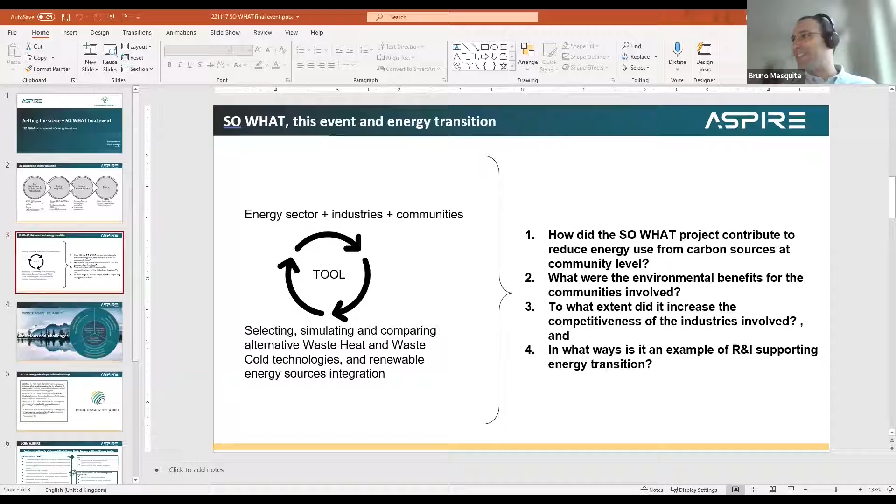Good morning, everyone. Yes, I can hear you. So thank you for having me today. I will share my PowerPoint. I mean, I don't want to start today by boring you too much. So this is just like a quick visual aid.

My name is Bruno. I am a project manager at A.SPIRE, an association of European process industries that represents 10 sectors, more than 22 countries, and it has 180 members. My objective here today is to briefly frame for you the challenges facing us in terms of energy transition.

So, given what is happening in Europe, you will probably not be surprised if I tell you that the EU has a serious energy problem. In fact, the EU can only provide half of its gross inland energy consumption. For instance, in 2013, we produced only 47% of our needs. As a result, the EU is dependent on non-renewable imports and primarily of fossil fuels.

In the middle of the 2010s, the International Energy Agency was even predicting that Europe's energy import dependence would increase to 90% by 2035. And moreover, of course, in terms of environment, our energy systems and industry account for at least 2/3 of the total greenhouse emissions.

So it is therefore not surprising that the EU has set ambitious goals to change that. We are seeking to reduce our greenhouse emissions by 55% in 2030 and to be climate neutral by 2050. The objective is to limit global warming to a manageable 2 degrees Celsius so that we can have safe, healthy lives and continuing livelihoods and stable, rich ecosystems.

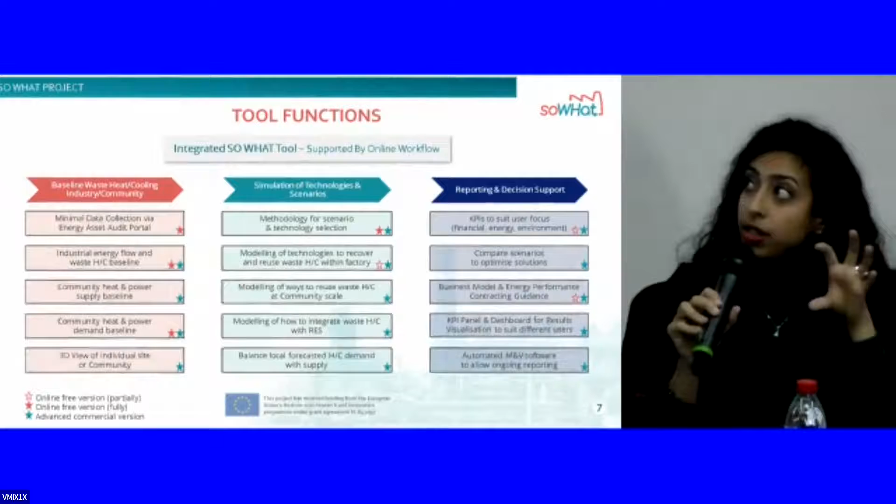As you can see, the tool starts by estimating the baseline in terms of waste heat and cooling, industry and community. Then the industries and the final user have the opportunity to simulate different technologies and scenarios. And afterwards, there is the outcome of the tool that supports the reporting and the decision making.

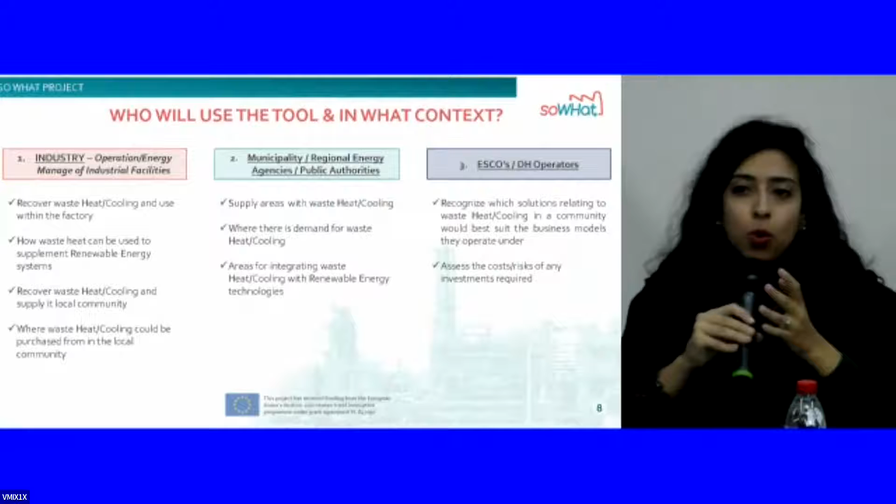The targeted final users are industries, so main players of the sector, the municipalities, and regional energy agencies, public authorities that are the decision makers in that field. And finally, the ESCOs and the district heating networks, because we are talking about recovering this waste heat and cold, which could happen either internally in an industrial site or externally. In that case, ESCOs and district heating operators are highly encouraged to consider all the opportunities in the surroundings.

This was my first couple of words to introduce the So What project. Thank you very much. I would like, before leaving the floor, to thank in particular my colleagues from RINA Consulting, Arianna Amati and Francesco Peccianti, who are the coordinators, previously Francesco and afterwards Arianna, that allowed the smooth development of this project in the past 3.5 years. Thank you very much.

Thank you very much for the introduction. It's my pleasure to give a snapshot of this important phase of the project, the Industrial Site Assessment and Technology Database, which covered one of the first work packages of the project. I was particularly glad to lead this piece of work, but I have to acknowledge some key contributions: people in my team in Birmingham, but partners were instrumental to the work and the results we achieved. The IES team, the RINA team, MPI, and in general the industrial partners for the support in the Industrial Site Assessment and Technology Database.

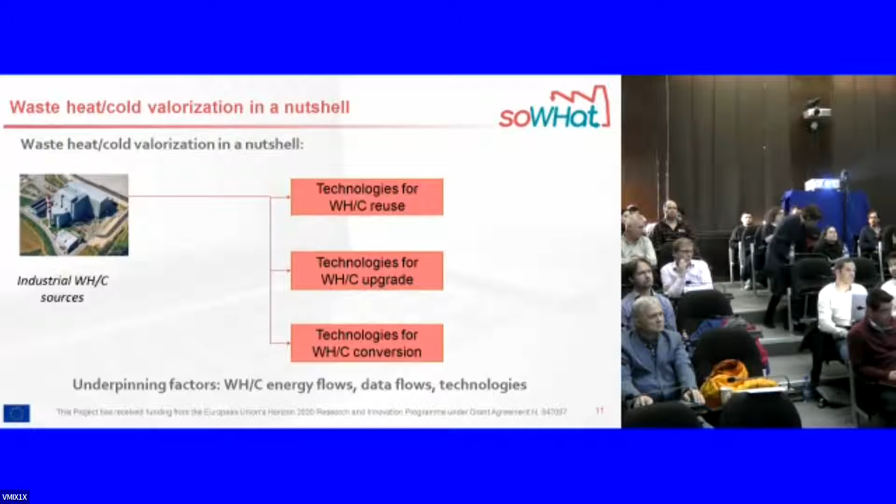So once we have the asset to recover the waste heat, what we can do, and what the SO WHAT tool helps to understand, is how to reuse this heat either internally in the industrial sites, or potentially, and this is one of the key selling points of the SO WHAT work and tool, externally. So we might interface this recovered heat with external networks. This can be district heating, so industrial symbiosis between the industrial site and the surroundings. And if heat is converted into electricity, perhaps with electricity and energy networks.

And on top of that, if we have an increased amount of renewables and intermittent sources, we might want to store some of this energy to use it at the best time. So out of this quick run through the basics of waste heat recovery, you might understand that there are three key pillars that were part of the work done in this phase of the project. Understanding the energy flow, so actually identifying how much waste heat is available, having the right information to do this assessment, so data from industrial sites and in general from the infrastructure that you see here, and obviously the technologies. And I'm going to touch upon each one of these three aspects that were covered during this industrial site assessment and technology database.

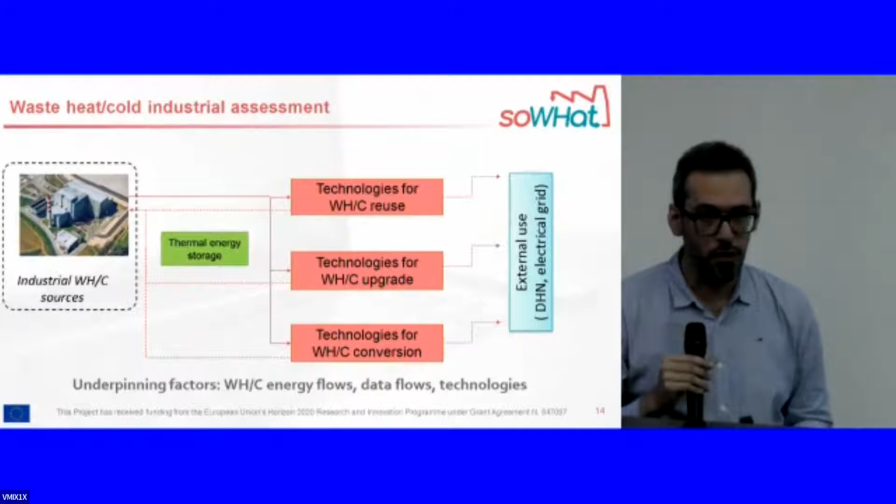Very importantly, a big chunk of work was done on understanding how to overcome the challenges in collecting data from industrial sites necessary for this type of assessment, and also some work on the mapping algorithms that I'll discuss briefly as well. So going back to this model, I'll touch upon those three key aspects, starting from the industrial sites and the assessment that was carried out in this space with the demo sites in this project.

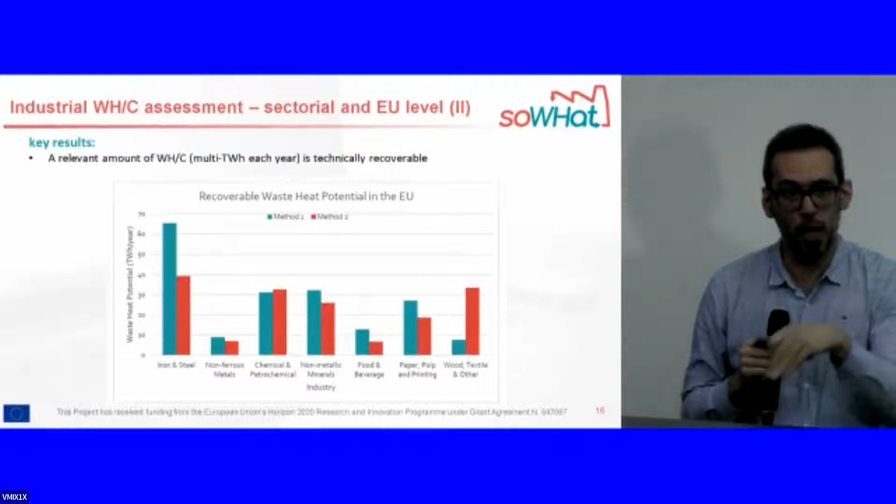So this is fine as long as we are working at sector level, but we want to help industrial partners, industrial sites, and the SO WHAT tool intends to do that. So we have to drill down to a more granular level and move from a sector to actually process level, so that the industrial players can actually identify how to remove these inefficiencies.

So this range of industrial sites allowed the project to test the tool in very different conditions, and also essentially identify a way to recover waste heat from relatively low temperature heat, 70 degrees or so, to particularly high temperatures across the sector. So for example, food and beverages are typically relatively low temperature waste heat, and if you move to steel and metal manufacturing, obviously we are going above 1000 degrees C, and it's essential that the tool allows us to span all this range of temperatures.

So as I mentioned, the first phase looked at assessing at process level, at individual site level, how the waste heat was wasted indeed. And this has been much more challenging, but also basically the added value of this tool. So as we move to assessing the industrial sites, we found that in general there was consensus that at industrial scale, first it is essential to quantify where this waste heat is occurring. So literally at which location in the process, which are the units where heat is wasted.

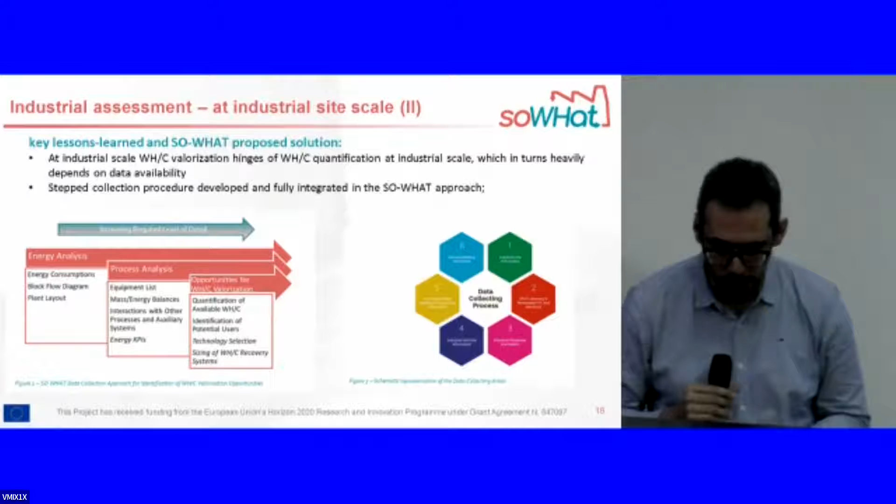And overall, out of this initial assessment of industrial sites, a stepped procedure to capture data was identified. And the SO WHAT tool has essentially a guided procedure along 6 macro steps that allows the end users to obtain the right data to identify the amount of waste heat, and then to select the best decisions to valorize this waste heat. So this was one of the key aspects in the first phase of this assessment at industrial scale.

So the team of the project did this for all the industrial sites, all those 11 sites that were presented before and that I briefly touched upon. So obviously there is no time to go through all of them. I picked an exemplar case to give you a sense of the potential and the capabilities of the tool, and of the assessment that was done.

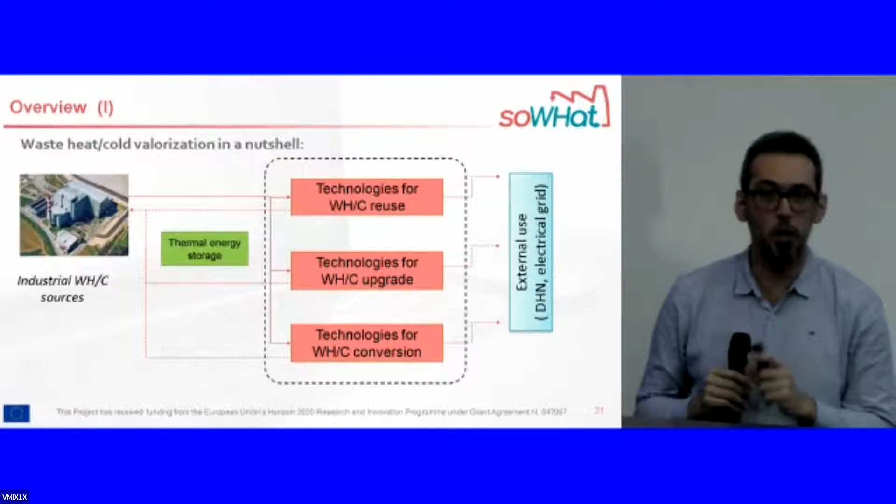So going back to our simplified model of waste heat and cold recovery, I'll move to the second pillar that was covered in this part of the project, which is the technologies, the actual assets that allow to recover and utilize this waste heat. And this is a piece of work the University of Birmingham led.

One of the key selling points of the SO WHAT tool is that it spans across all the possible types of technologies that are available on the market or that are emerging. So an interesting bit is that the SO WHAT tool allows the end users to also be conscious and aware of emerging technologies so they can direct their investment at the right time, so that they can have a competitive advantage by adopting more advanced technologies.

But there are essentially five categories, from traditional ones like heat exchangers, waste heat to cold, so sorption chillers, for example, heat upgrade, heat pumps in general, and power cycles, where the waste heat is used to produce electricity. And the remaining one, which I will discuss separately, is on energy storage and thermal energy storage. Those are enabling technologies, as I will discuss later.

A good amount of information is captured in one of the public deliverables of the project that is on the website, where, for those of you that are interested, you can read 250 more pages about technologies. Obviously, I cannot cover all of those. I'm going to give you, again, an exemplar case to give you a sense about the information that is there and how it can benefit you.

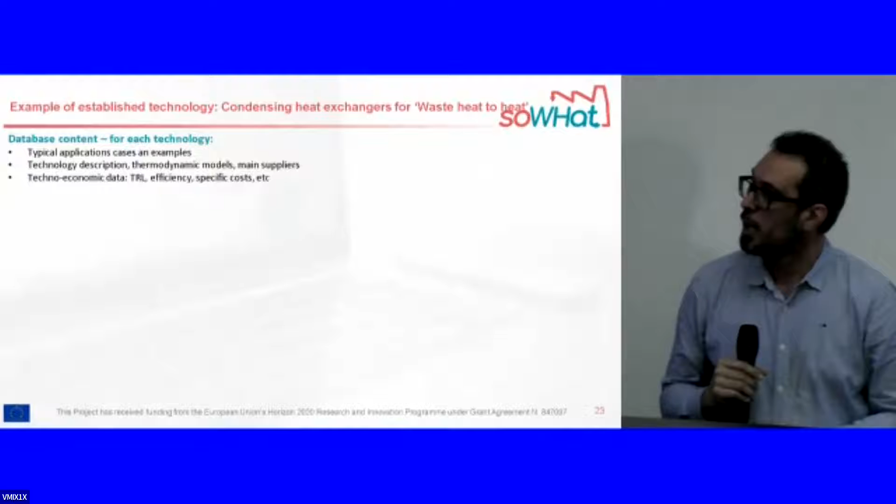The deliverable provides also the key information about who the suppliers of this technology are, and very importantly, for industrial players to do technical assessment, and obviously for the SO WHAT tool algorithms as well, there is technical and economic data about these technologies. So you can find performance indicators, efficiency, and costs of these specific technologies to take informed decisions on potentially investing in them or using them.

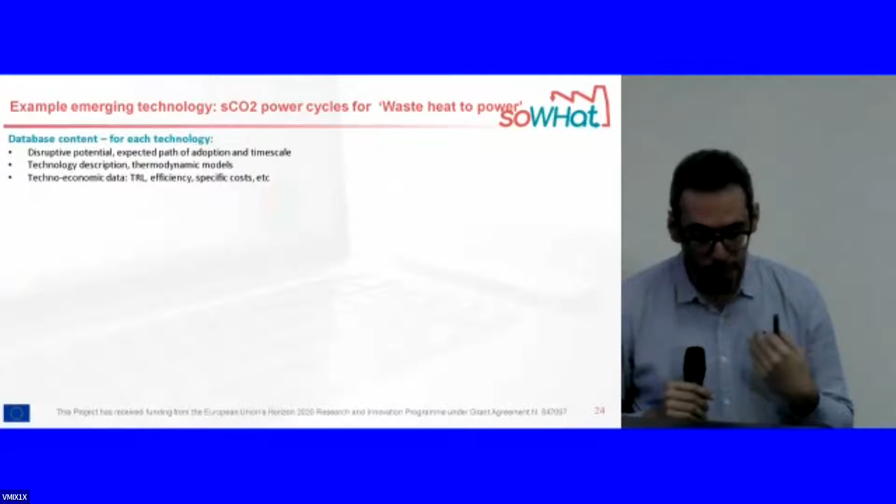So it recovers waste heat by converting it into electricity. There are various reasons why supercritical CO2 can be used and why it's beneficial. That's part of the information captured in this project. As I mentioned, this is a case of emerging technology.

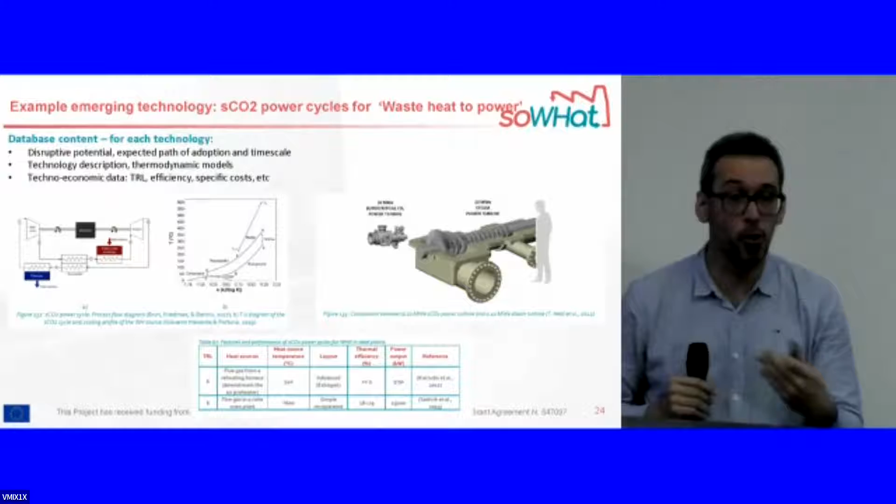And similarly, there is some indication in this case about the TRL level. So how close this technology is to be adopted, and what are the typical performance parameters for this technology, so that eventually industrial stakeholders can be aware of the fact that this is coming up and is near to market potentially, and they can take actions if necessary, or if the technology fits their needs, with the support of the SO WHAT tool.

Okay, moving to the last pillar that I want to cover with our mental model here for waste heat recovery. One of the key aspects of the SO WHAT tool is where we wanted to look at how energy storage might fit into the picture of waste heat and cold recovery valorization. So the fundamental reason is the following one. Traditionally, industrial processes have mostly used fossil fuels as a way to produce process heat or cooling. So a dispatchable form of energy. This means that you can always potentially use fossil fuel at any point in time.

That dramatically changes if we move to intermittent renewables or perhaps intermittent waste heat, where the primary source, the waste heat or the renewables, might not necessarily be available when we want to use it. So we need an extra degree of freedom in the middle that allows us to either store the primary source when it's not used, or release it when we actually want to use it. So the work that was done was about thermal storage.

There are a number of open access publications that were produced in this project that are, again, available for consultation, and obviously the necessary algorithms and characteristics have been brought into the SO WHAT tool as well. So I'll give you a snapshot about what has emerged from this part of the work in this project. First of all, there is a range of possible technologies. Most of the industrial players, we became aware, know about traditional ways to store heat or thermal energy, say in stratified hot water tanks, up to 150 degrees C if you work in pressurized conditions.

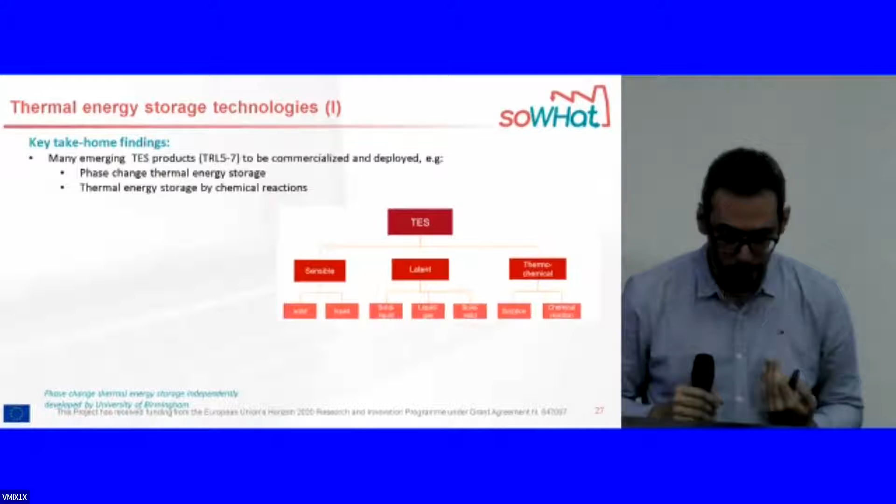Out of the understanding that we developed in this project, we actually developed one thermal storage technology that uses a certain substance to store heat at 100, 200 degrees C. And this is now in use at an industrial partner in a national project. Without the understanding from developing the SO WHAT tool, we couldn't really have developed these technologies. And now it's used in the food and beverage industry to mitigate the intermittency of waste heat and make the process more efficient.

So, as I mentioned, there are various applications from an energy storage perspective. The typical ones are energy efficiency, so waste heat recovery, valorization, etc. But also quite a bit of renewable integration can be facilitated with energy storage. And again, the algorithms and the assessment carried out in this phase of the project fed into the development of the tool that you will hear about later on, so that the tool allows decisions not only about the previous waste heat recovery technologies, but also on energy storage. And that, we believe, is an added value of the project and of the tool overall.

So I'll give you just an example again of benefits from an industrial perspective of using this tool, and in this case, using thermal storage technology. We have developed a specialized methodology in this phase of the project to help industrial players in deciding which is the best thermal storage technology for their case, how to operate it, and therefore ultimately how to select it and how this benefits the industrial players.

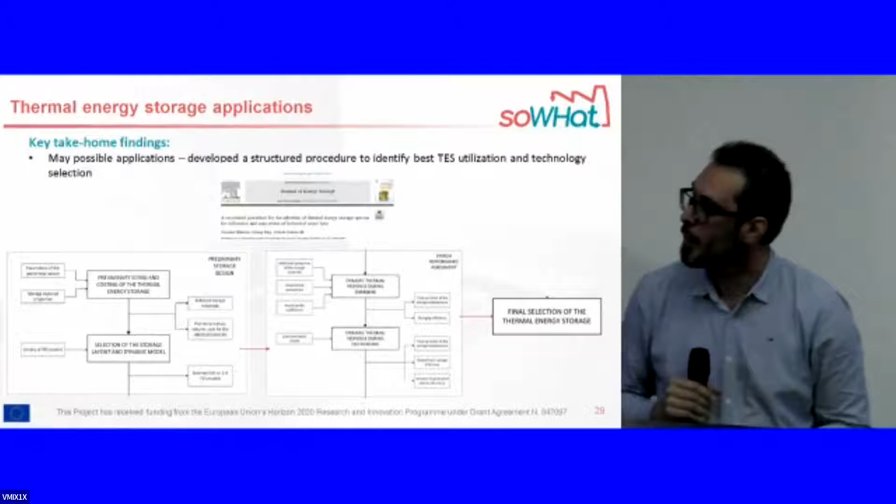So with storage, we mitigated that intermittency so that it could be used more easily by what is called the power block. A power block is a technology that converts that waste heat into electricity, but without first making it more smooth and more constant with the thermal storage, this was not particularly possible.

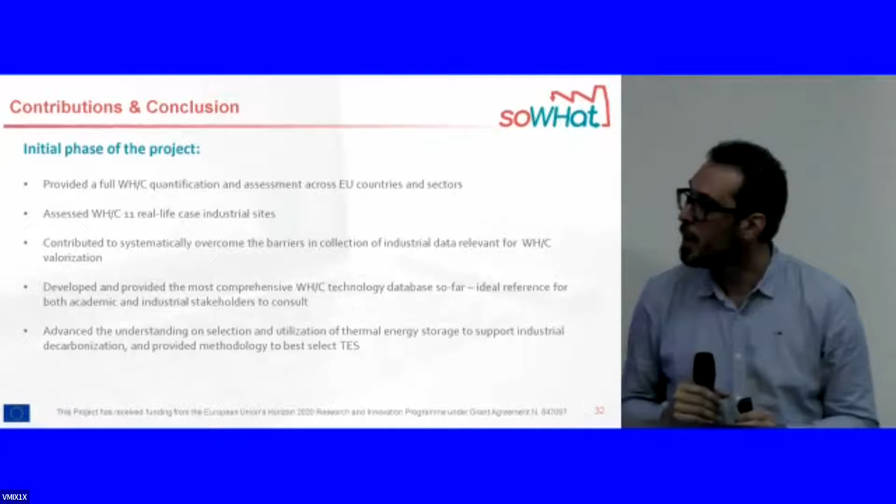So this brings me to the last slide. A quick final run-through of the contributions of this phase of the project. We provided a full waste heat and cold valorization assessment at EU level for each main industrial sector, assessed in 11 industrial demo sites. We contributed to obtaining a clear and systematic procedure to capture the data necessary for assessing waste heat and waste cold recovery strategies at industrial level.

We developed a range of algorithms and understanding of technology that is now embedded in the SO WHAT tool. And ultimately, on the R&D aspect, particularly advancing the understanding and the utilization of energy storage in the context of waste heat recovery and renewable utilization in industrial sites.

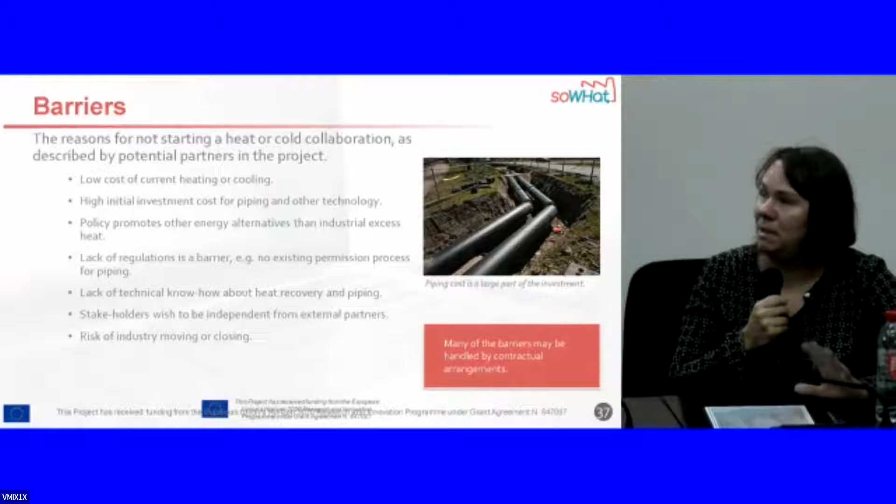Yeah. But what we see is that many of these barriers may be handled by contractual arrangements. So that is something we have dug into also, how to actually manage this, to overcome these barriers. And we have also identified the business risks. And this is something that is also elaborated in the tool. So a risk assessment can be made and some suggestions on how to mitigate risks.

But as you know, there is no such thing as a risk-free investment. But depending on local prerequisites, the risks related to heat collaboration will be quite different. Especially a watershed is if there is an existing heat network or not. But you can also see this as a risk reducing thing, because you will not be as dependent on fuel and the fuel prices that fluctuate. So it's not only risks, it's also a way to reduce risks.

As with the barriers, most of the risks can also be mitigated with good contracts. For example, you have to have a clear contract that states the responsibilities, which part of the technical equipment and so on is on which side, and who's responsible if things don't work as they should, and how to also communicate those things.

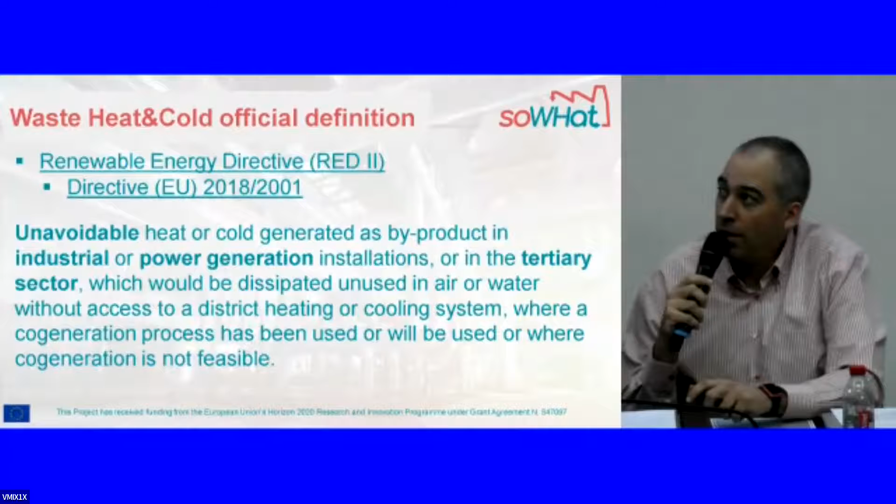So, I guess all of you are already familiar with the fire triangle. The fire triangle tries to explain that to start or sustain a fire, you require three elements simultaneously: heat, oxygen, and fuel. From the very beginning of the project, we applied this concept to waste heat recovery. So we use this analogy to define the three simultaneous components required for waste heat recovery. The first one is a source of waste heat, which has been deeply explained in Adriano's presentation. The second required element is a recovery technology, or a thermal storage technology. And the third element required is the end use of this recovered heat, of this recovered energy.

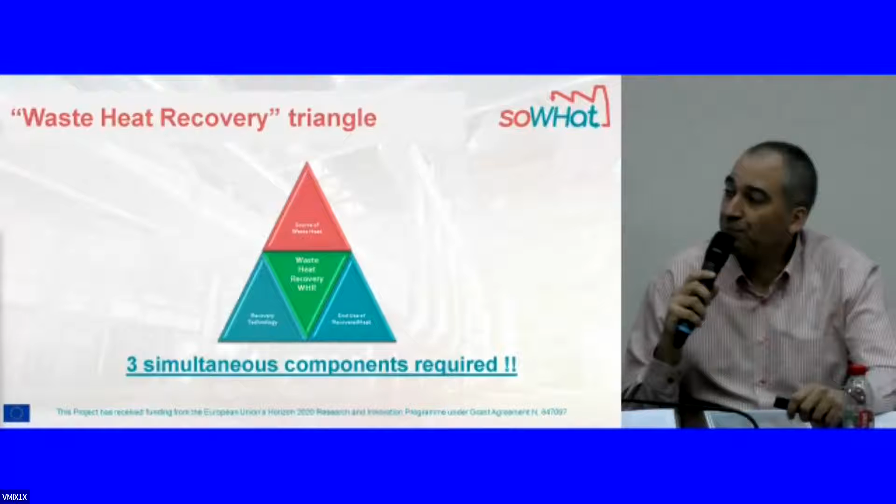So, starting with the waste heat sources, I'm not going to repeat Adriano's comments. You have plenty of information on our website, but we consider what is called the energy cycle. So from a conventional, and I repeat, conventional means industrial factory perspective, the energy is usually initially converted, and this conversion usually generates conversion losses, which can be a possible source of waste heat. For instance, a typical example would be steam boilers that convert natural gas into steam. Then we have the distribution losses when this energy is distributed along the different industrial facilities.

And again, this is a possible loss, but not usually considered a source of waste heat. And we will end with the end use of this energy, which again represents an opportunity, a possible source of waste heat.

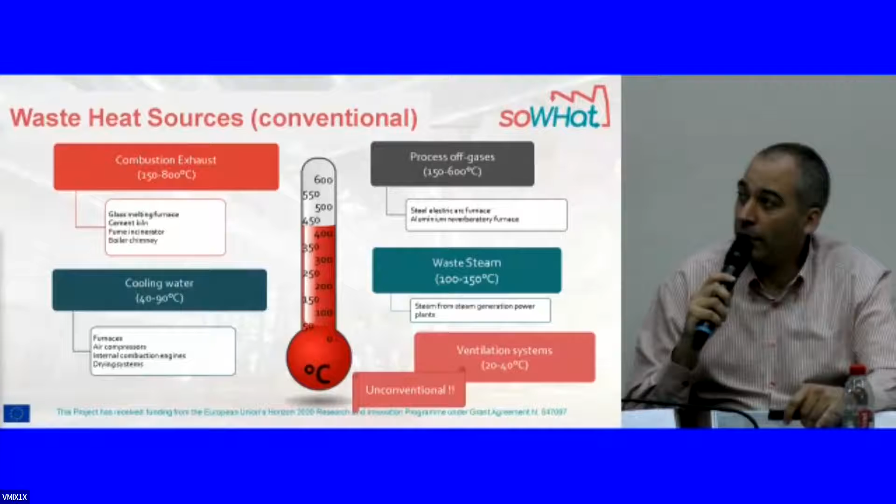Regarding the different temperatures involved, quite quickly, from an industrial perspective, from a conventional classification of waste heat sources, you can find combustion exhaust, process gases, waste steam, cooling water, and finally, ventilation systems. But in this case, ventilation systems could also be considered unconventional waste heat sources. Again, you have plenty of technical information in our first work package deliverables on our website.

So again, exactly the same regarding the technologies. Adriano perfectly mentioned it, I'm not going to repeat it. So we jump into the third element of the triangle, which is the end use of the recovered heat. And here we have two possible end uses of the recovered heat: internal use and external use. And I think we are sometimes forgetting internal use.

Internal use of the waste heat in a factory is quite important. I mean, for every case we found where a factory sends the recovered heat to an external use, we can find tens of cases where this heat can be used internally within the factory premises. And I think it's important to not forget about that.

Indeed, among our demonstration cases in the SO WHAT project, we have two use cases where recovered waste heat has been internally delivered without exiting the factory premises. So when we talk about internal use of the recovered heat, we have one straightforward option, which is to recover and directly reinject the waste heat into the same process that originally caused this waste heat. This is a typical example of retrofitting boilers to install economizers and so on.

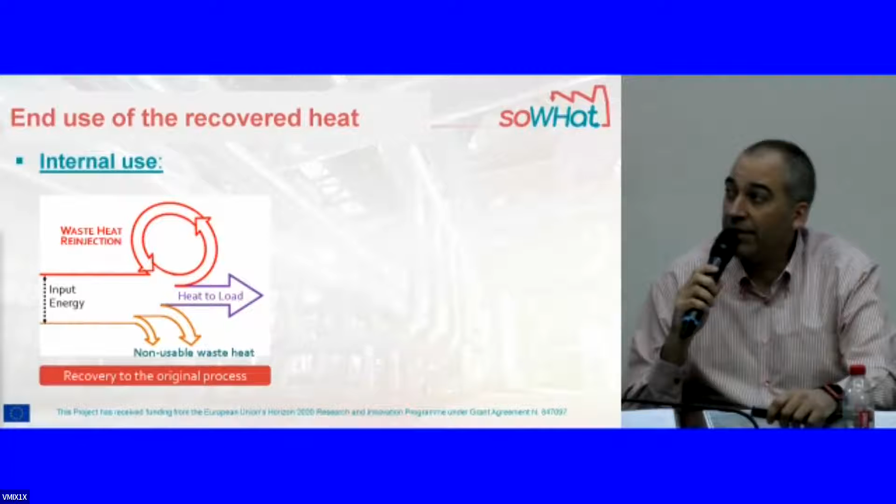Usually, it's not considered a waste heat recovery process. Sometimes it is perceived by factory managers as an improvement of the machinery efficiency. Then we have the second and more complex case, where waste heat is recovered from one industrial process and transferred to a second manufacturing process, but within the factory premises, within the boundaries of the factory itself. And sorry to repeat it, but these are two of the use cases we have.

And jumping into the external use, things get terribly complicated, as Sofia mentioned, because we have a possible source of waste heat, a possible company, a possible actor, and we have a different actor, which could be the user of this waste heat. You can initially think it's simple, but things get really, really complicated because, as mentioned, contract arrangements can get really complicated with or without the presence of ESCOs.

So you may have a possible use case where, from the technical perspective, everything is clear, not problematic at all. But when you make the numbers, there's no possible economic arrangement that satisfies the economic requirements of all the partners involved. So, to summarize, we have three elements to consider simultaneously. Obviously, to maximize waste heat recovery globally, we will have to rely on external recovery, and this probably can only be made through district heating.

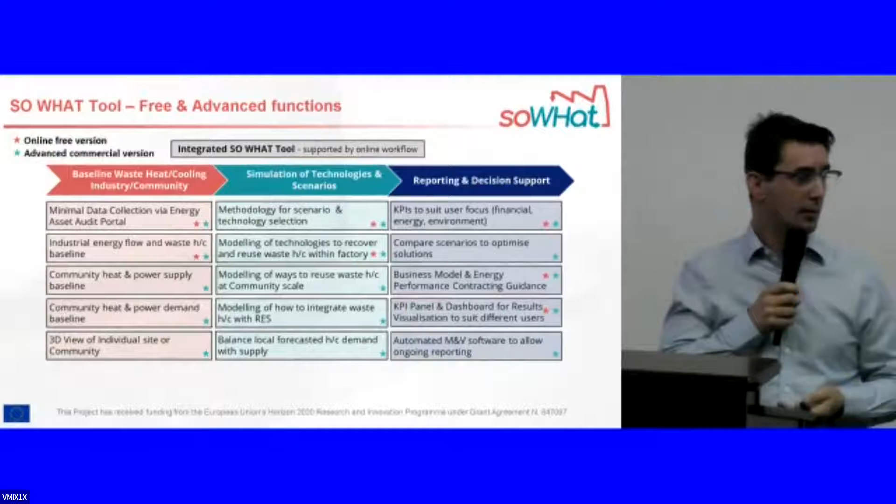There have definitely been two key areas that we've focused on in the project. One is the technical element and how you can technically do some of these technologies to recover waste heat and cooling. But the other aspect is how can this be done financially as well? And there are two different types of audiences, two different types of users that want to know that kind of information.

I think we've seen this slide earlier, but it was just about who are our actual users, who are we aiming this software at. We're looking at industry, where there may be any waste heat or cooling. We're also looking at municipalities and regional energy agencies. And we're also looking to engage ESCOs and district heating operators as well throughout Europe.

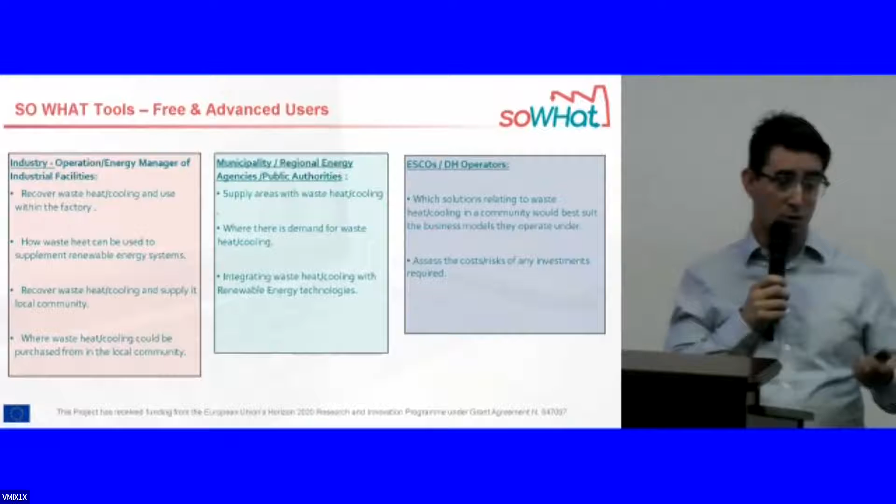So what I'm going to do is just talk everybody through the steps that we have in the free tool. And I'll just show an example of that, and then I'll go through the more advanced tool. And all through the whole presentation, I'll be using the case study or the demo site that we have in Italy, just as an example as to how you can use the tool.

So here, all the user needs to input to try and understand their waste heat potential is their country, the main fossil fuel that's used on their site, their industry, and the overall energy consumption of that particular site. And this then looks up against all of the information that we've been able to find about all industrial sectors and their waste heat and cooling potential in academic research. And we then run different calculations to come up with the waste heat potential of that particular site.

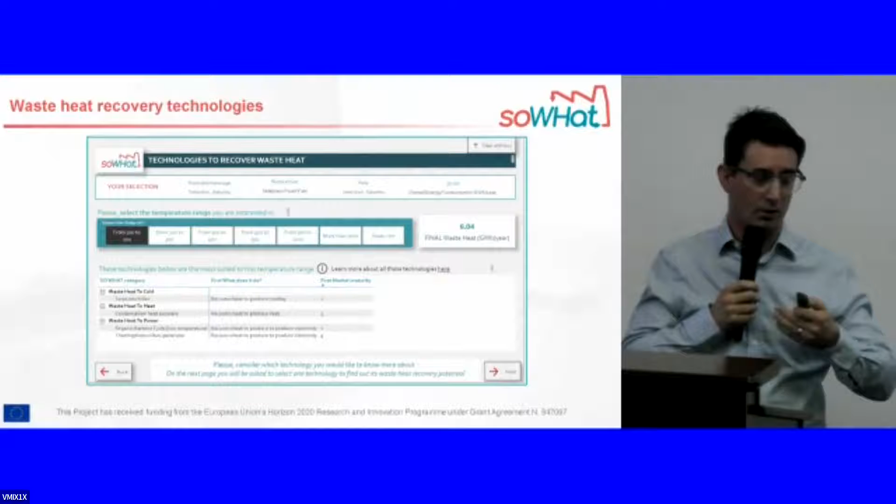And this also shows something around market maturity of different technologies. The project has tried to model not only technologies that are easily available across different countries in the market, but also ones that are just coming to market or are actually more just now in development phases. So if an industry wants to look at something that's quite innovative, this market maturity guide will also allow them to do that.

Once you select your technology, so here it's selected as condensate heat recovery, we then get some figures around what that technology might be able to produce in terms of the final heat outcome, and also the maximum temperature that it will give as well.

And the next aspect of the free tool allows you to do a quick risk assessment for your particular industry, which starts to try and allow you to understand what the particular issues or risks might be for implementing that technology. And we can see there that there's a spidergram that actually shows the different elements of risk, and then that allows an individual to go away and try and think about, okay, is this worth doing or not? How can we mitigate those risks?

We've also implemented in the free tool quite a simple financial analysis to give somebody a quick understanding, from just inputting different costs and investment scenarios and discount rates over time, what their payback or internal rate of return or net present value might be for that particular investment.

And I should stress that the overall aim of this free tool is to allow somebody just to get a quick guide as to, I guess, the best way forward for them in waste heat and cooling recovery. This is not supposed to be the final piece of work that you would do on it. It's just to allow you to do a quick 30-minute overview. Is there something here? Can I go further with this? Can I take this to my boss and say, give me some resource to now do a much more detailed assessment? That's what this is for.

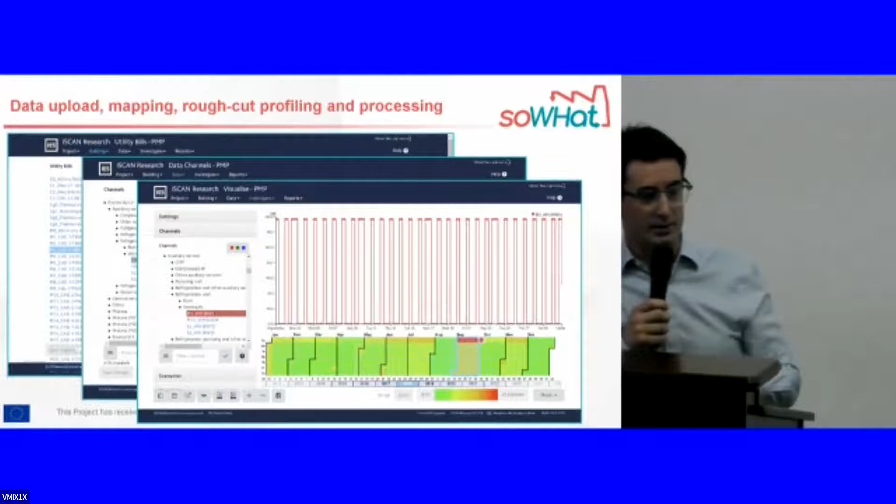We would also ask for the hourly schedules of different processes and how the facility actually works. That enables us then to take different processes, different meters, different billing information, and associate it with the different components in a facility. And we can then build a profile of a particular process in terms of how much energy it's actually using and also how much waste heat it might give off.

We can then model this. In here you just see a simple factory model, and those processes and components can be joined together. And we can actually also in the software look at different elements of HVAC controlling, and we can also look at different weather conditions that might be important for the future too, and we can simulate those.

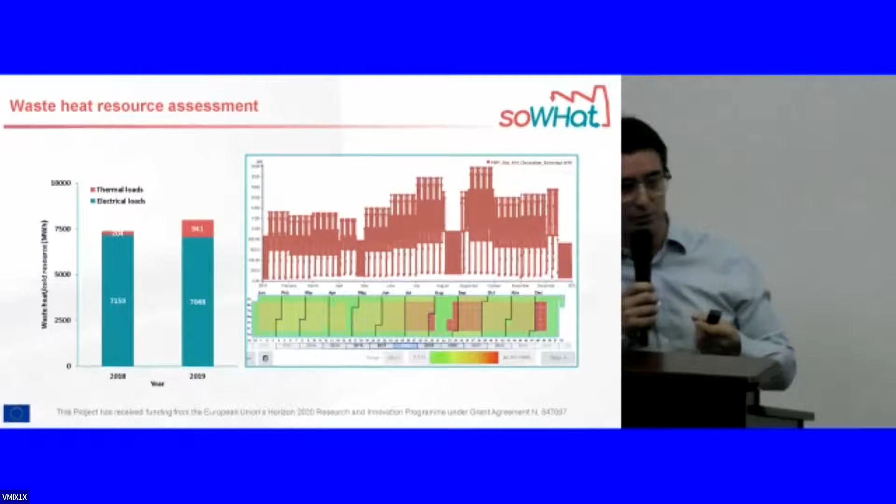At the end of this data collection exercise in the software, the graph on the top right actually shows not only your waste heat resource, but it actually shows that at a time series level, at an hourly level. I think that's quite key. You don't often see that. We're used to seeing maybe waste heat at a monthly or annual kind of figure, but actually being able to see it at a time step down to an hour is quite important if you're wanting to recover it and understand what you can do in your facility.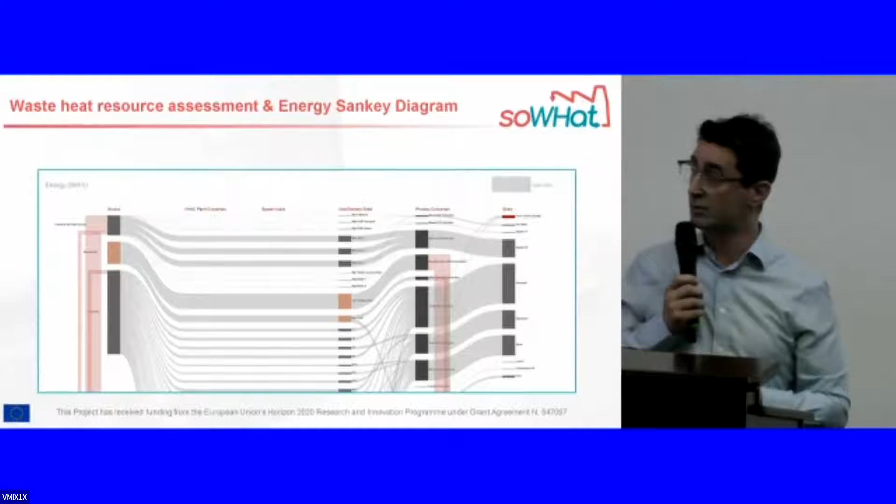And the little red box at the top right hand side of that energy Sankey diagram, that's the waste heat as a sink at the end of this flow, and that's where you would then look to focus to recover your heat from. And obviously this also gives you some temperature ranges and outputs in terms of how much heat there is.

In the software, the advanced tool gives you the ability to model things in a sort of 3D, give you a 3D view. And we can also bring in anything to do with energy, heat demand at this stage as well. So we're not only just showing potential supply aspects in terms of waste heat, but we also import heat demand from different buildings at this stage too.

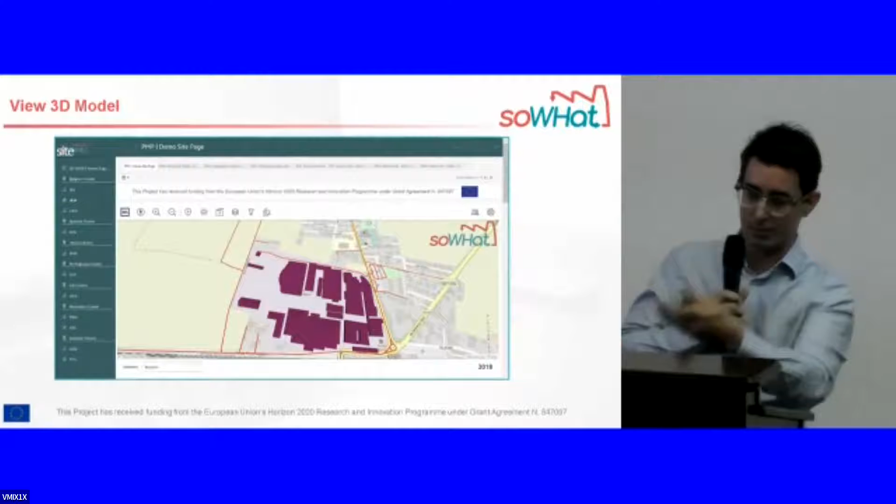So here you can see, I'm just showing online, you can see the 3D model view online that we set up. You see in terms of just the initial baseline, you can see the energy Sankey diagram that's available for people to look at, and you have all of the key indicators for what's actually currently happening with energy and heat and potential waste heat in your facility.

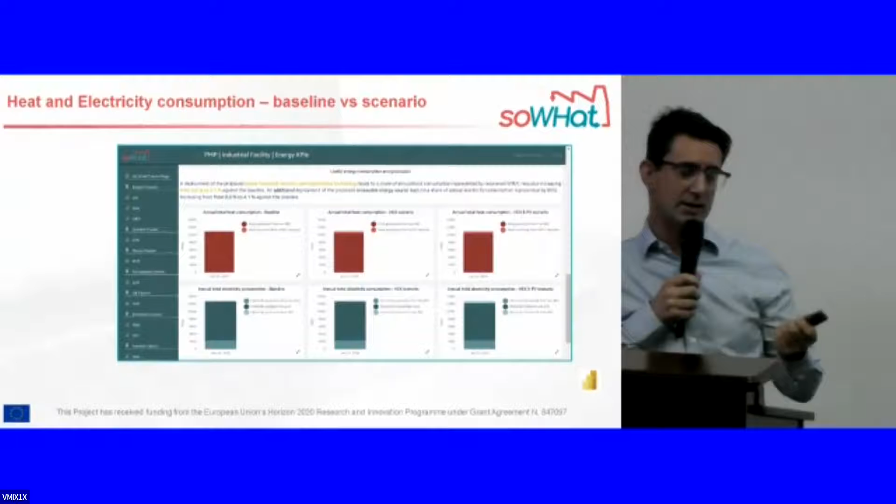You can also do the same in terms of the heat and electricity consumption. So here you would be able to see how much heat the facility was requiring, let's say in terms of the natural gas grid, how much it was using, and then also after you've done some waste heat recovery, you can see how much you're using from the grid and how much you're now using in terms of waste heat, how much you're saving therefore. And the same with electricity, baseline against different scenarios. There's also the ability to see that in terms of CO2 emissions as well.

And then again, you saw in the free tool, we'd implemented quite a simple financial analysis. This more advanced tool now brings in a lot more elements that you can layer up in terms of your analysis. So this would be something that you'd consider now pretty robust. You've gone through a very detailed simulation of different technologies, and you can now add your financial analysis onto that. And this would be something that a financial director would be very interested in.

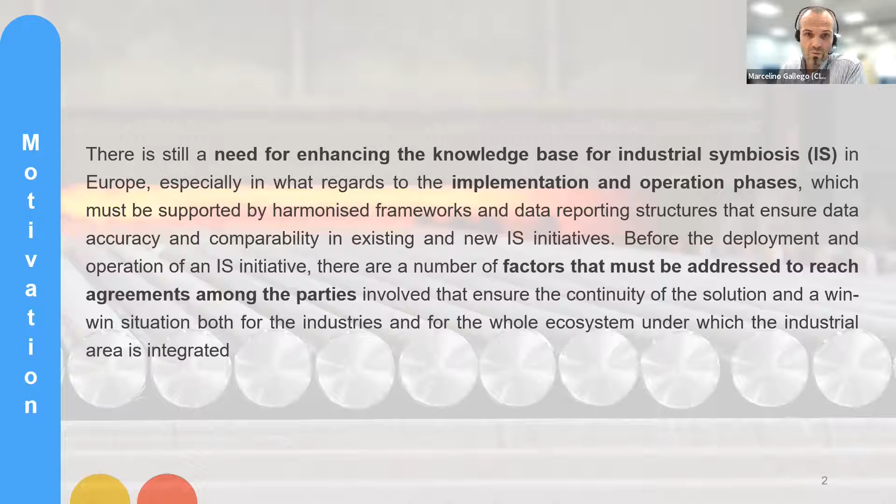However, there are not too many big projects where industrial symbiosis solutions are applied. And there is a theory about industrial symbiosis, but not really applied in the field, okay? And once the industrial symbiosis solutions are implemented at a real scale, there is a necessity to identify the factors which have influence on this industrial symbiosis solution.

The industrial symbiosis readiness level consists of 3 pillars: a technological readiness level, economical readiness level, and managerial readiness level. These 3 elements are interlinked in a holistic way. I mean, the 3 of them have the same importance, and the industrial symbiosis readiness level also goes from 0 to 9. Before Coralis, there were some low industrial symbiosis readiness levels in the lighthouses, and after the Coralis project, we will see how this industrial symbiosis readiness level will increase.

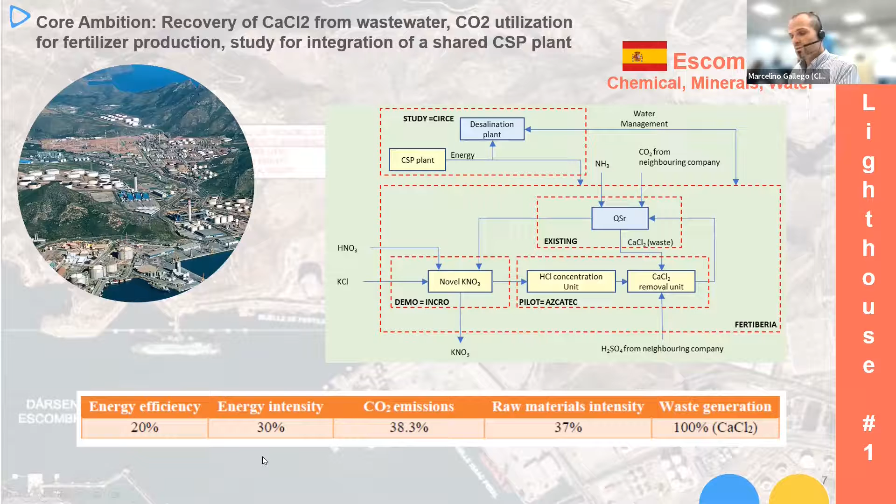The waste of this process contains calcium chloride, and we will combine this calcium chloride with some resins and also with CO2 or with sulfuric acid coming from a neighboring factory, in order to remove the calcium chloride from the waste and use it as a byproduct or pure hydrochloric acid for the process. Below you can see the impact which we hope to get at the end of the project.

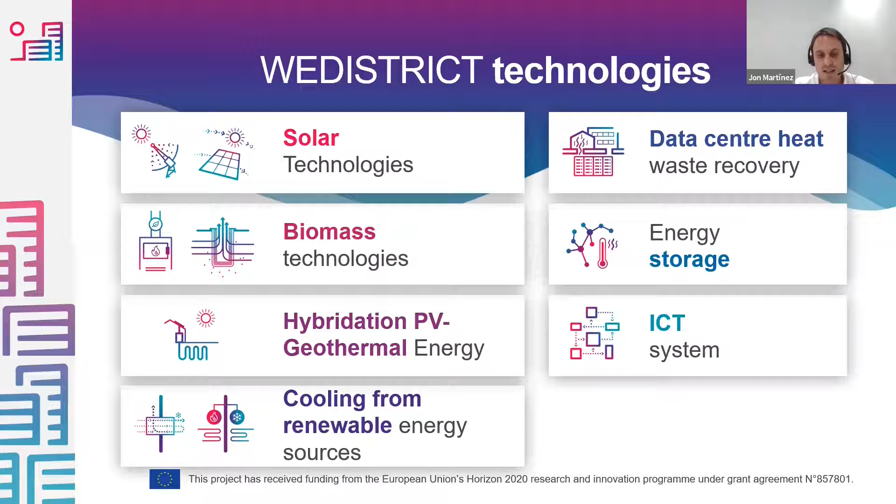Besides these technologies, another objective of the project is the integration of smart ICT to manage the production, storage, and consumption of DHC networks. The inclusion of accurate weather forecast and demand prediction helps to manage, through smart control strategies, the production and demand variables.

In the WeDistrict project, we will validate the combination of different renewable solutions in 3 pilots located in Bucharest, Luleå city in Sweden, and Córdoba in Spain. These projects engage all the stakeholders through the 4 phases within the whole process: the requirement analysis, the design and development, the demonstration stage, and the final one, the analysis of the results and exploitation phase from technical, economic, and environmental

point of view. In Córdoba, a new district heating and cooling will be constructed in the campus of the University of Córdoba, that is a partner of the consortium, integrating solar thermal technologies, low emissive biomass boiler, absorption chillers, and thermal storage.

In Bucharest, we are retrofitting the existing gas cogeneration district heating in the campus of the university. This retrofitting is being done by integrating geothermal and solar hybridization to enlarge its heating and cooling capacity. There were some buildings that were wanted to be connected, but there wasn't enough power.

In Luleå, we will integrate the data center waste heat into the existing district heating network using a pioneering technology based on biogas fuel cells. Besides these 3 real demo sites, the WeDistrict project wants to demonstrate the replicability of the project in different business scenarios through virtual demo studies.

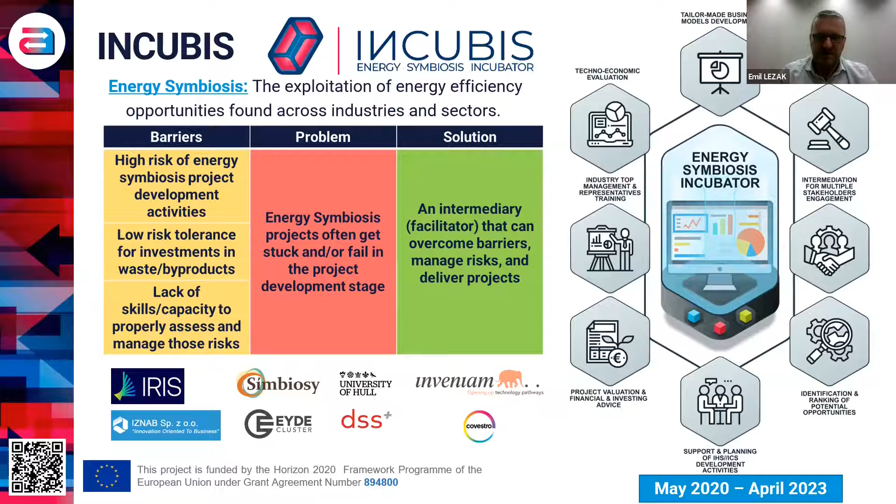The project has been divided into 3 phases, and now, as I said, we are on the last straight to deliver the virtual platform for incubators. We started this through identification and mapping of the energy intensive industry, then characterization of the needs and the gaps through analysis and optimization of all the aspects related with the synergy opportunities. And we also determined the economic feasibility for matching the stakeholders.

Now we are in the implementation of the virtual incubators in different locations. Motivation as well as objectives were also established at a high level for different kinds of stakeholders, which you can see on this graphic, and read what exactly the motivation was.

In brief, it was for economic and environmental purposes, meaning to reduce the cost of energy use and use of the relevant materials, as well as reduce the taxes related with waste landfilling. And from the environmental point of view, reduction of CO2, as I have mentioned, and reduction of the waste going to landfill.

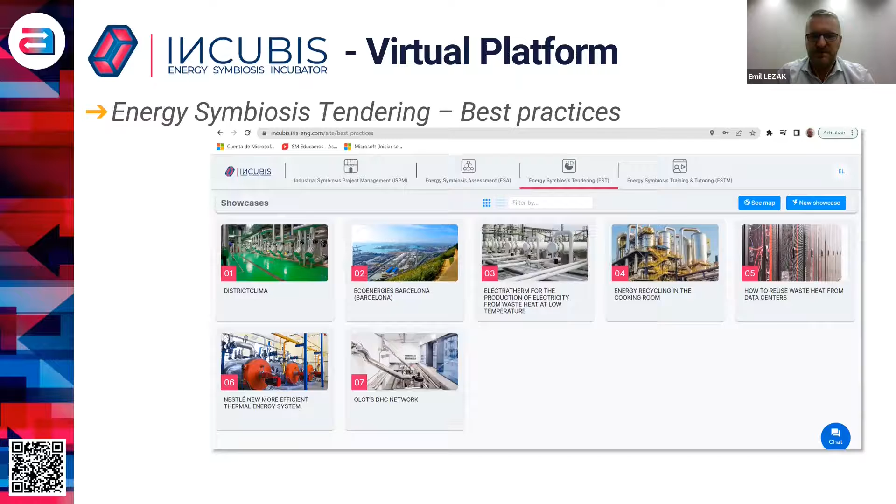We have also included here some of the webinars which have been organized and delivered by the Incubis partners, and you can find them there in PDF files and be more engaged in our project, the Incubis project. At this moment, we have launched this. We want to officially perform the communication campaign at the end of this year, which is already now. And from January up to April next year, which is the end of the project, we want to perform the replication study as well as training events for each of the regions I presented on the previous slides.

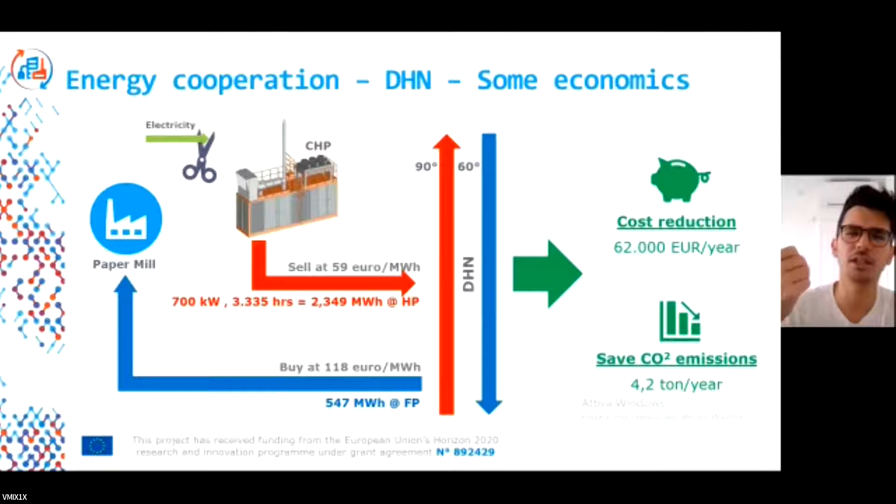Currently, the paper mill and the multi-utility are defining the operational part, and they are working on the legal aspect by using our legal tool. So our tool now is helping them in a totally easy way to find the legal part and to agree on specific aspects of energy cooperation.

Well, the vision of our project. Our project is not limited to just the 3 pilot eco-regions, but we want to open the door to other industrial parks. We want to replicate the success that I showed in the Bergamo region, and what we want is that industrial sites and business parks can turn their energy potential into energy hubs.

For us, energy cooperation is the solution, and the vision of our project is to keep promoting the transition to a circular economy model based on heat exchanges and, of course, industrial symbiosis.

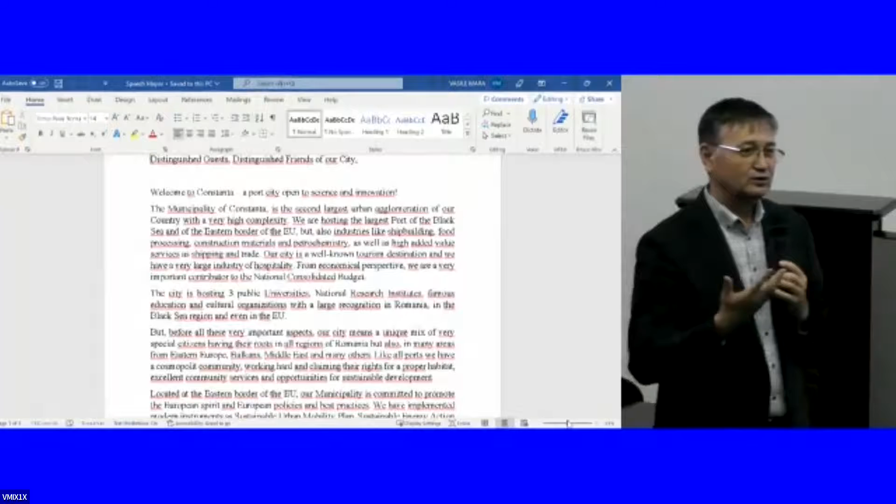The second aspect mentioned by our mayor was the fact that the municipality of Constanța is facing a very difficult period. Here in Constanța, we are very close to an area of conflict with many consequences, with many refugees located here. And in this very complicated context, we appreciated more the real reason of the European Commission to push forward on decarbonization, on increasing the share of renewable energy, and in this way to assure the energy security not only of this area but of the entire Europe, and to assure a better future for Europe.

So from that perspective, the mayor of Constanța underlined the commitment of this municipality to promoting renewable energy, the possibilities to use waste heat, and at the same time to put a strong emphasis on a holistic type of approach. Once again, the mayor excused himself that he could not join this meeting, but his message is extremely important. He appreciated that this consortium succeeded to develop this tool, which is a very important achievement. And now with this tool, we are in the position to start building different application cases.

And finally, the mayor invited us not to stop here, but to go further with other project proposals. In that context, he assured all of us of the full support of the Constanța municipality for future projects, and particularly his interest to transform Constanța into a pilot, a success story, not only in Romania, but in the whole of Europe. So with such a commitment at that high level, I think we can do many, many things. Thank you.

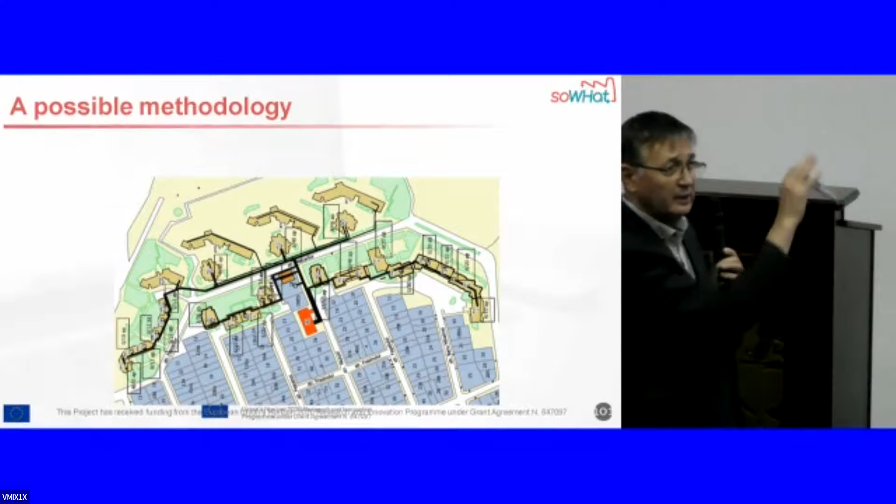So what is the challenge? You have seen that at present, the district heating company here in Constanța is operating more than 50 reheating units. And in each of these reheating units, there are different types of allocations of blocks of dwellings connected to such reheating systems. As you can see here in red is a reheating system assuring the thermal energy for the blocks that are around. So in that context, what's going on with this?

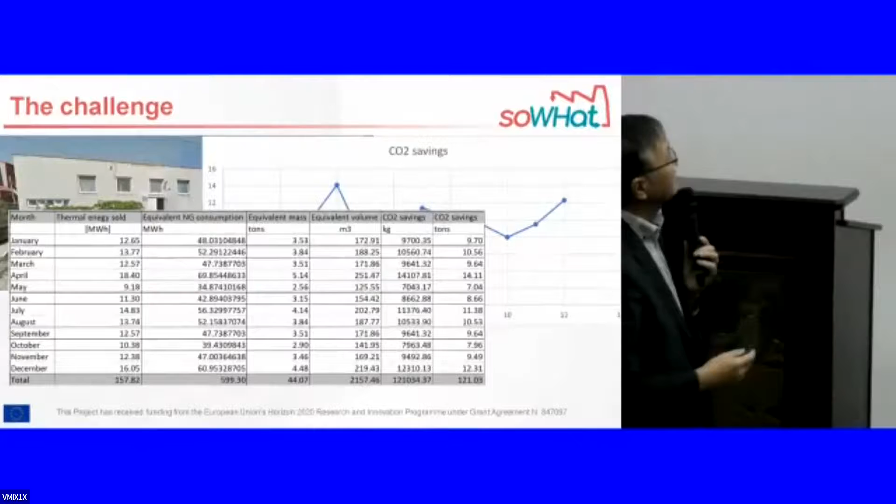So the major challenge is to find out a possibility how to reduce the environmental impact of these heating systems and processes within the city. You can see the balance and the consumptions of thermal energy in one of these, let's say, heating units, the heating stations in the city. You can see over the year, the consumption is covering some important quantities in megawatt hours. Then you can see the equivalent natural gas consumption, the equivalent CO2 emissions related to the production of the thermal energy based on fossil fuel.

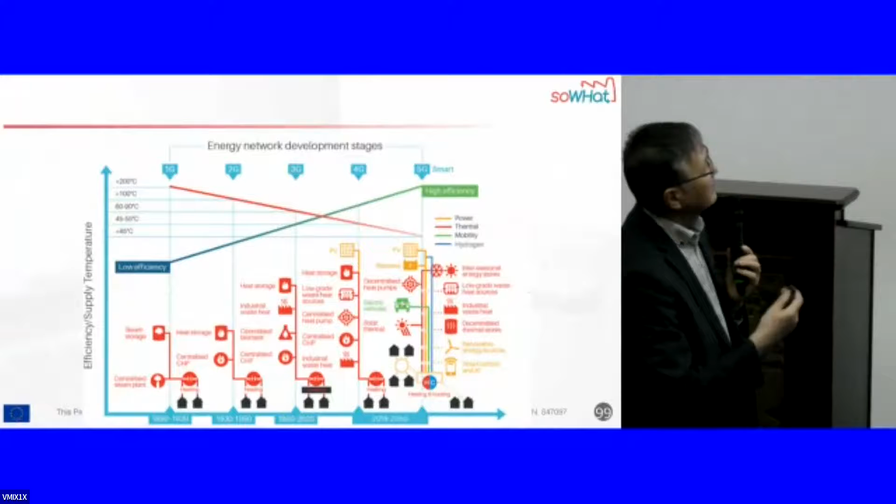So the idea was to develop an approach to, let's say, reach the current level of development of the district heating systems, where you know that we can integrate all types of renewable sources in order to assure a sustainable operation of such a system. So for that reason, as I said, we took as a pilot such a unit here in Constanța. We have studied the resources of solar energy that are available on that location. We have analyzed the matching of the solar energy with the consumption.

And based on that, this concept was developed, having, as you can see here, on the top roof, 120 solar thermal panels. And inside the station, there are these two pellet boilers, for covering the peaks and the required additional energy when needed. So we developed different types of analysis. This is a model of that. And then we had this chance to work with the SoWHat tool, succeeding in this way to develop the model of this plant in the tool.

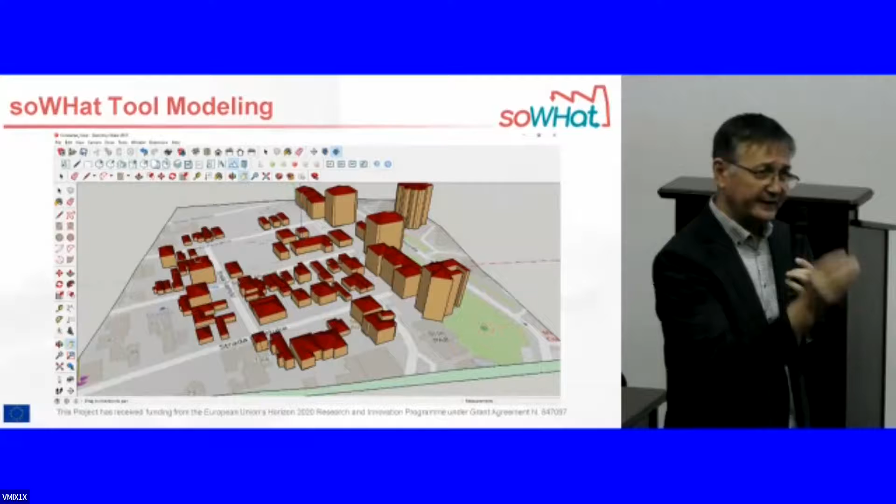And then, of course, we developed the aerial model of the location. And you can see here that the buildings were also imported, and particularly the secondary reheating station. And now there are different activities that we are carrying on. Our colleagues from the company Termoficare already procured equipment for thermography, to identify the losses over the entire value chain from the power plant to the final use.

And then we started also to identify additional problems. The city is located near the sea, is very windy, and also in the atmosphere there is a lot of dust. So the dust usually deposits as dust and dirt on the surface of the solar thermal panels. And there are problems related to the decrease of the performance of these solar thermal panels due to the dirt.

For that reason, in this institute, some of which you have seen just next to this building, our Institute for Nanotechnologies developed some anti-static solutions in order to protect the active surfaces of the solar thermal panels and reduce the deposition. In this way, we can go further and have these solar thermal panels with high importance.

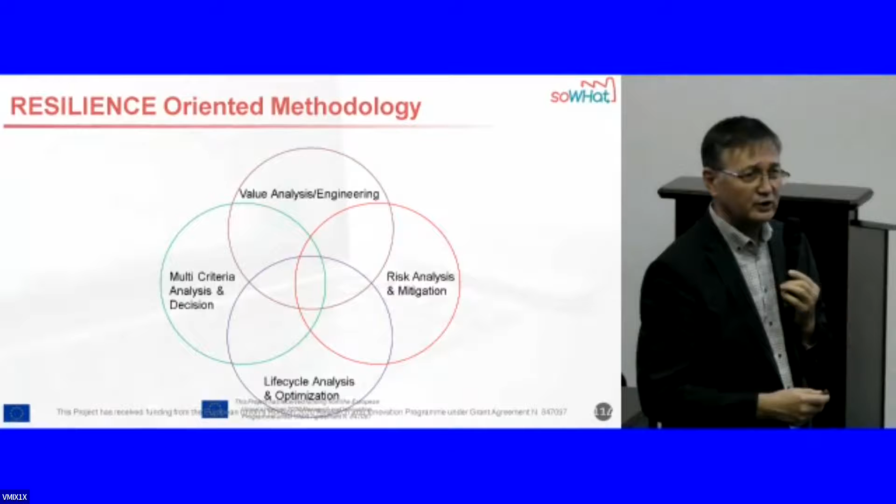Then, of course, we also analyzed different other possible risks that could occur in the operation of the system, to identify all these risks. And finally, we presented to our mayor the concept of an island, an insularized area of Constanța, where 6 of these kinds of stations can work together and help each other, transferring from one to the other.

Besides that, of course, we are planning in the future to look at other cities here in Romania. For instance, in Galați, there were experiences in using the waste heat from the steel industry for the district heating system. In Brăila also, there was a large chemical plant that was operating together with the district heating system. And we would like to evaluate this too.

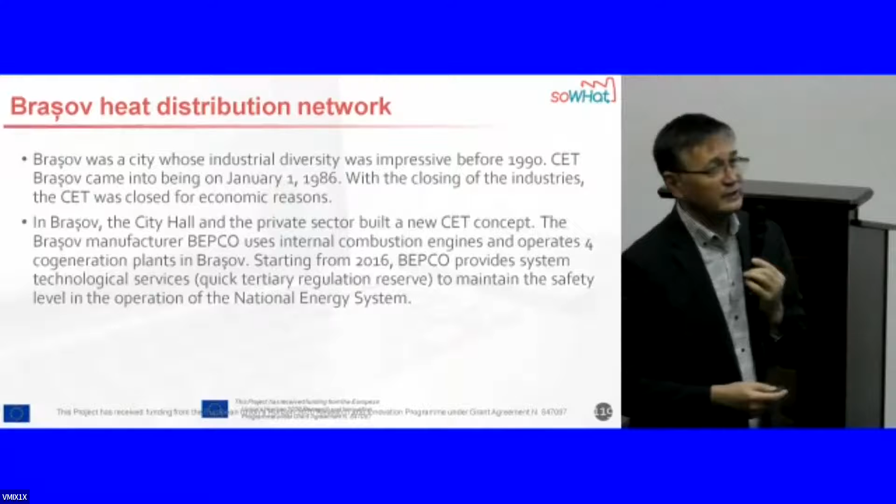In Brașov, located in the center of the country, there were many collaborations with the local industries in order to bring in different waste heat from the industry. In this way, we think it will be a very nice way of using the outcomes, the tools and all the experiences of this project.

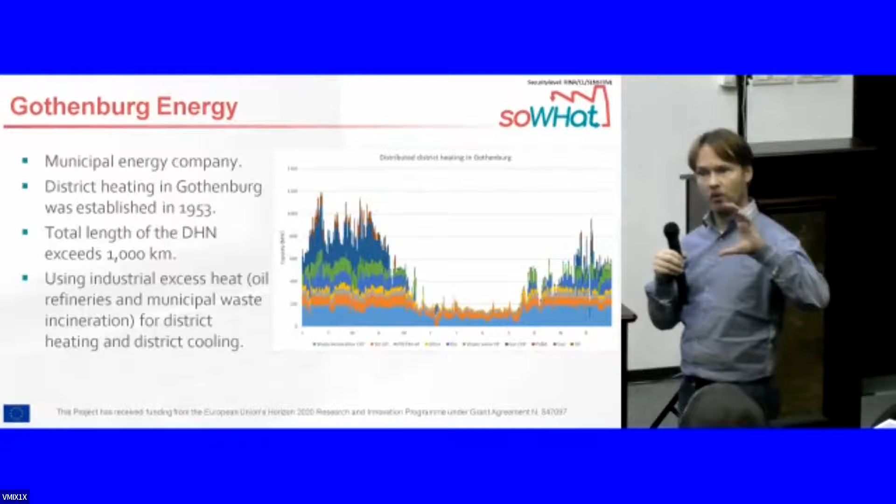As you see on the graph, at the bottom we have waste incineration, roughly 200 megawatts, and the 3 areas above are refineries. So that is the waste heat that we collect in our system. And the colors above are for the winter, because we need more power, so we also use wood chips for burning and heat pumps, etc., to manage the 1,400 megawatts that we need when it's cold in Gothenburg.

We also have a district cooling system where we use the waste heat in the summer in absorption chillers. Roughly 50% of all the cooling energy that we sell comes from absorption chillers, and the rest is equally divided between compressors and free cooling from the river. So we use free cooling in the winter from the river, in the summer we use absorption chillers, and when that is not enough, we have compressors to fill the peak load.

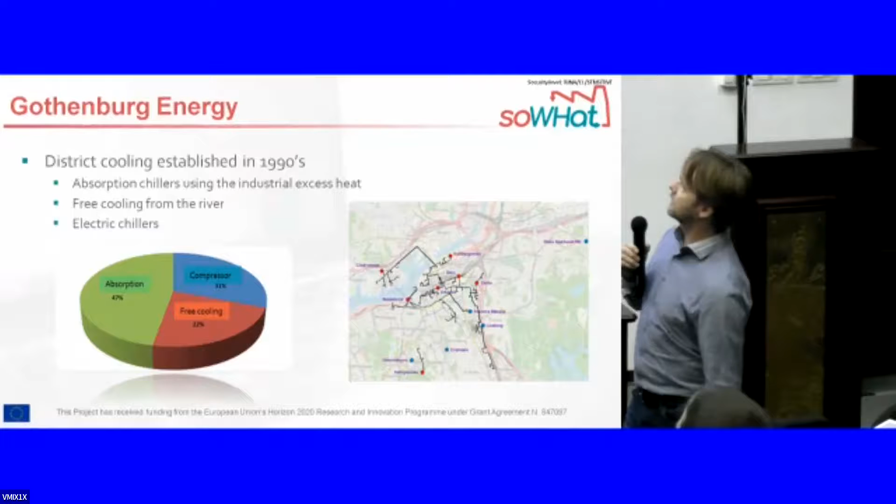During this project, we have installed a lot of sensors in our network and also in production to collect data for analysis. And then a few words about Varberg Energy. It's also a municipal energy company, in a smaller city than Gothenburg. And as I said, it was 2001, I think. The total length of the district heating network in Varberg is 140 kilometers.

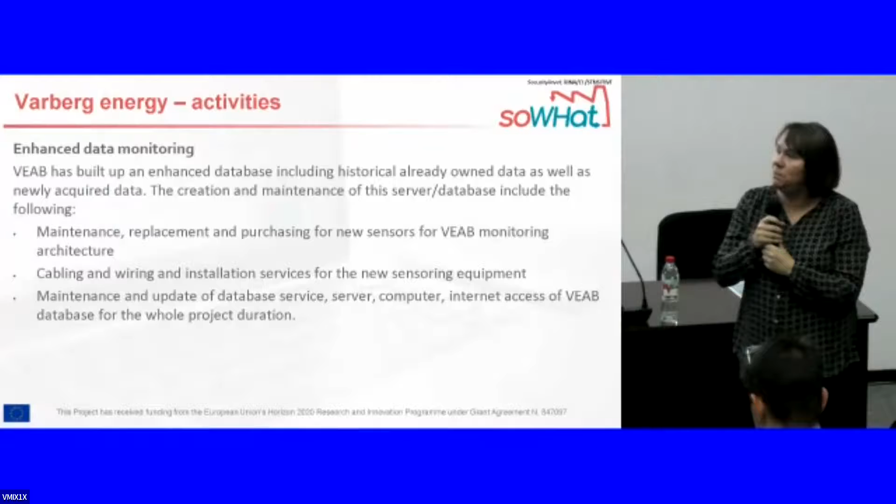We have tested this district cooling scenario with the SOWHAT tool to verify the tool, to see that it gives the same outcome as the feasibility study made by Varberg Energy themselves. Sweden is not a very hot country, but still district cooling is an increasing demand, especially for offices. That is the big increase.

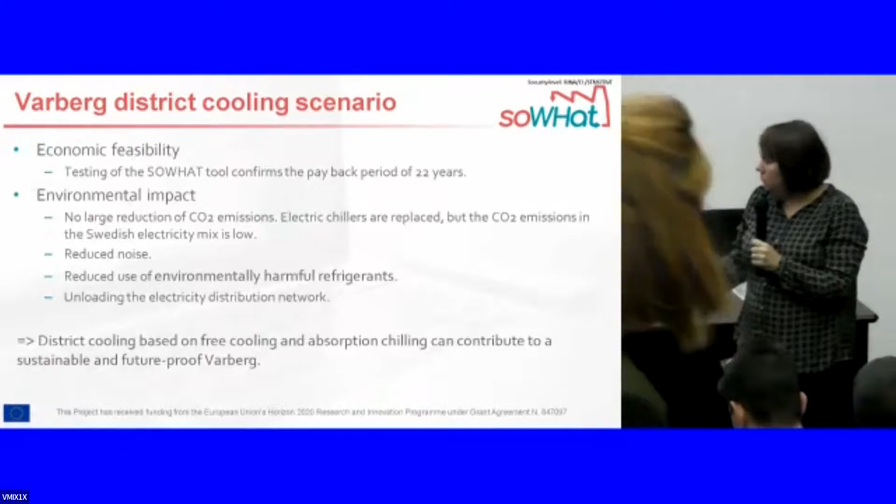So in the economic feasibility, we can see that the payback period is about 22 years. It's the same result as from their own feasibility study. And when we look at the environmental impact, since the cooling today is made by electric chillers, and the electricity mix in Sweden has a very small CO2 emission, we will not see a large reduction of CO2 emissions.

But what the city still thinks is that this is worth doing because it will reduce noise in the city, and it will be a more environmentally friendly system due to the reduced use of refrigerants. And it will also unload the electricity distribution network, which is a problem in many Swedish cities, that the capacity is full, so you cannot expand the city.

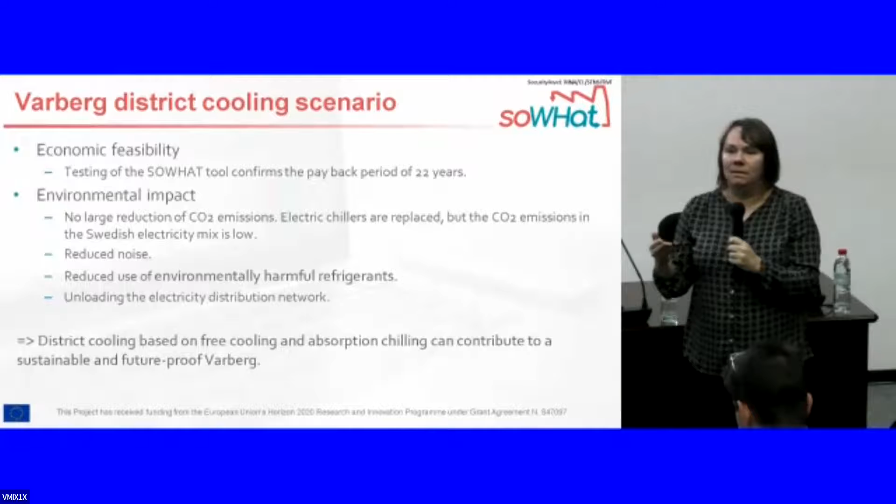And with the coming electrification of the transport sector, for example, we really have to think of reducing the electricity demand in different ways. So there are several goals that will be fulfilled, even though we won't see a large CO2 reduction. Yes.

So finally, this is what it looked like in the SOWHAT tool when we did the economic feasibility study, and you can see, well, it's the same result as in the facility's own feasibility study, that the payback period is 22 years. Yeah, that's what it is.

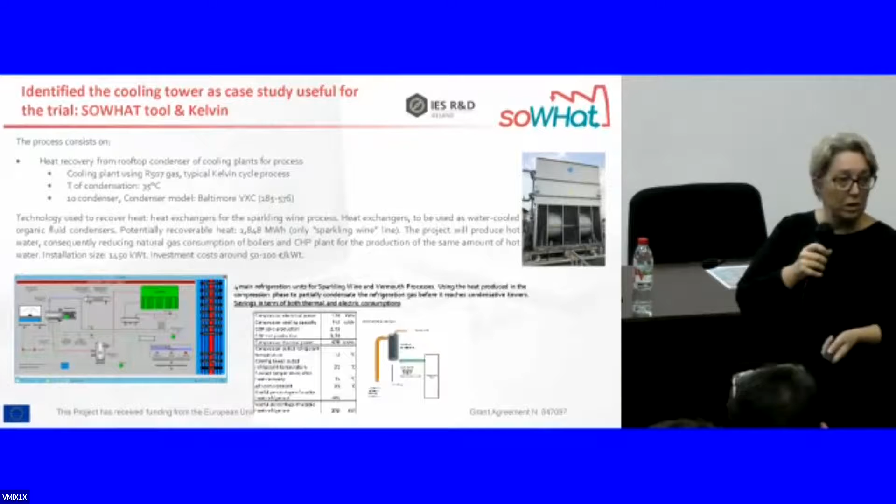So they identified also other scenarios, such as the sparkling wine process optimization. Also, they have PV panels. They also thought about using this kind of scenario. But what we present now is the scenario that was used mainly for the SOWHAT tool, the cooling tower, as a case study that was useful for the trial.

So the process consists of heat recovery from the rooftop condensers of cooling plants for process. The cooling plants use a refrigeration gas, typically based on the Kelvin cycle process. The temperature of condensation is around 35 degrees, and there are 10 condensers in the process. What they also identified is that the main technology that can be used to recover this waste heat is a heat exchanger for the sparkling wine process, and it can be used as water-cooled organic fluid condensers.

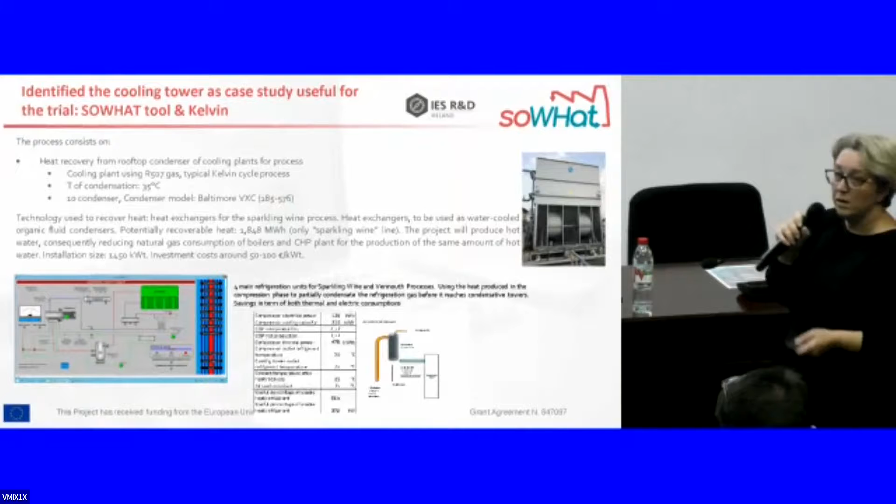The potentially recoverable heat is around 1,800 megawatt-hours only for the sparkling wine line. And the process will also produce hot water, reducing the natural gas that is mainly consumed in the boilers and CHP plant. So here are some details of the process and also temperatures of the plant.

So linked to this is a very useful scheme that identifies the use of this heat exchanger in order to recover the hot gas that comes from the compressors. The heat is used mainly to warm up the environment, and only during the winter period. So you can check here the main circuit in which the idea is to install the heat exchanger. So what they have done is to include this calculation, this consideration, in the SOWHAT tool.

What is possible to recover is natural gas, and that is the energy vector, and it's possible to have 350 megawatt hours per year as heat recovered, that is an input in the SOWHAT tool. So this table reports the energy recovered to produce heat. These are the main numbers that are put as input in the SOWHAT tool.

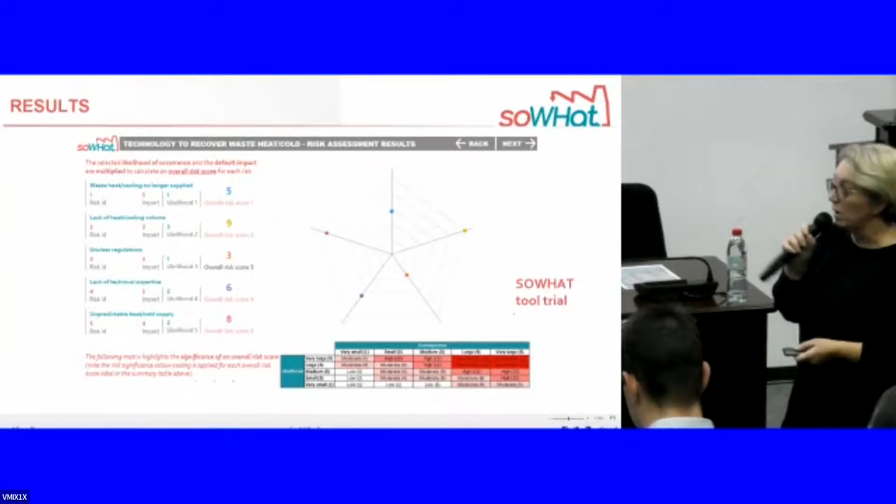And then also here, as I said before, it's possible to choose the technology that can be used for this recovery. And also here we have some risks that are linked to this kind of technology. They are not so high, these risks. The only one is connected to lack of heat that comes from the lack of use or the functionality of the evaporation tower. So linked to this, these are the main results.

The net present value we checked is around 100 kilo euro. The internal rate of return is 26%, and the payback time is 4.5 years. Linked to this, we have also a calculation of the avoided CO2 per year, and linked to the 20 years of the investment for our idea and our project.

Just some lessons learned that come from the use of the tool. The main starting points are, as I said, to define the hot gas temperature and pressure. So some data that are the input for the SOWHAT tool: identification of annual compressor use rate and recoverable energy, and also definition of technology and scope.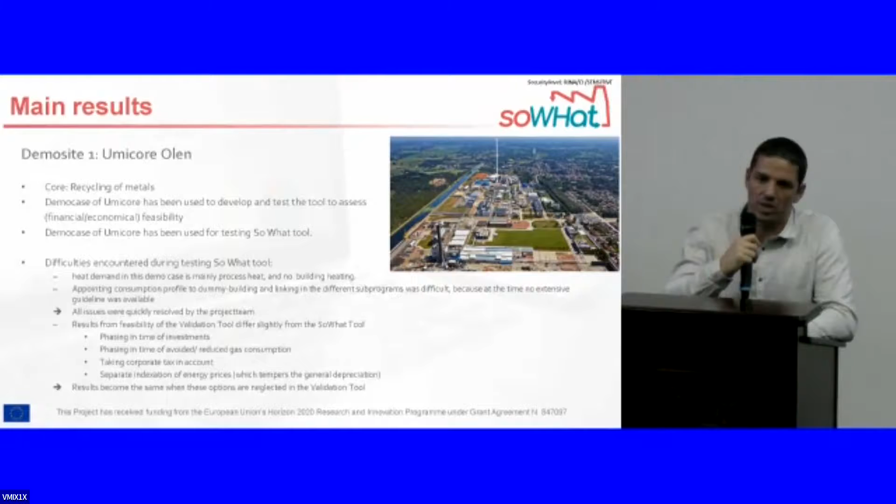They are small differences, mainly because the heat is internally used and prices are near to each other. The differences are due to differences in the tools, where the validation tool has phasing in time of investment, phasing in time of avoided reduced gas consumption, and takes corporate tax into account. And there is also a separate indexation of the energy prices, which is not in the SoWhat tool. So it's just another approach, but we have to compare it to see if, in the end, we get the same results.

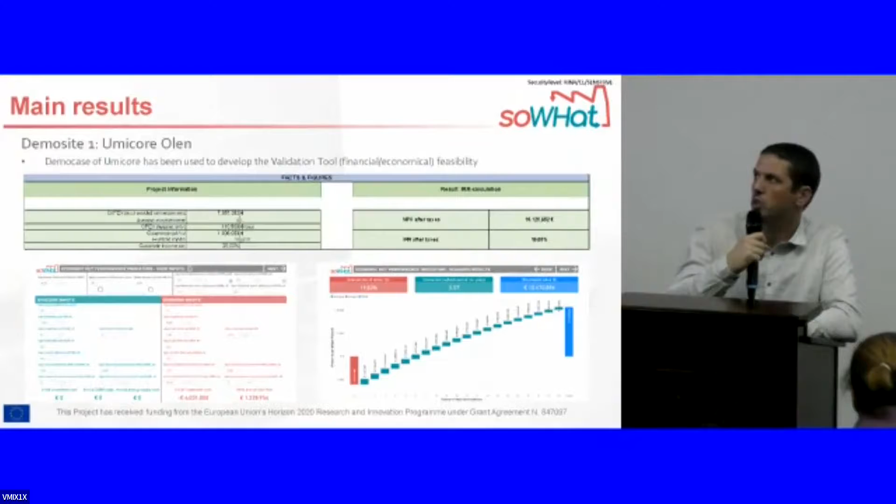If we look at the differences on the Umicore side, we see on internal rate of return and payback period, but also on net present value, small differences. Whereas in the SoWhat tool we get an internal rate of return of 19.83%, in the validation tool it's about 19.03%. So that's very near to each other. And also on the net present value, there is a slight difference. We looked up the differences, and we looked at the differentiating parameters, as I mentioned before.

Of course, doing the project in practice on the Umicore side, we're not going to invest everything in the first year because you can't build it in 1 year. So there we put in a phasing in investment over 2 years, and also a phasing in time of avoided reduced gas consumption, because the users of heat, we cannot revamp them to hot water in 1 year. It goes in phases, also divided over 3 years. We've taken corporate tax into account, and there was separate indexation. That explains the difference in results.

If we put those differences to 0, you can see that the SoWhat tool has the exact same result as the validation tool. So that's quite good news for us to see that we've built a tool which can completely be validated.

To have a larger stretch, we also validated the tool on a totally different demo case. The next demo case is the ISVAG waste incinerator. The difference here is that to reuse the waste heat, to valorise it, we have to sell it outside the company borders of ISVAG, to a company, Atlas Copco, very nearby. We saw a potential of 38 gigawatt hours on a year basis for waste heat. It's a very continuous source because it's a waste incinerator. It incinerates all year long, mostly at the same level. And the demand we detected with the SOWAT tool on the Atlas Copco site was about 10 gigawatt hours, mainly in the winter. So the match is absolutely perfect.

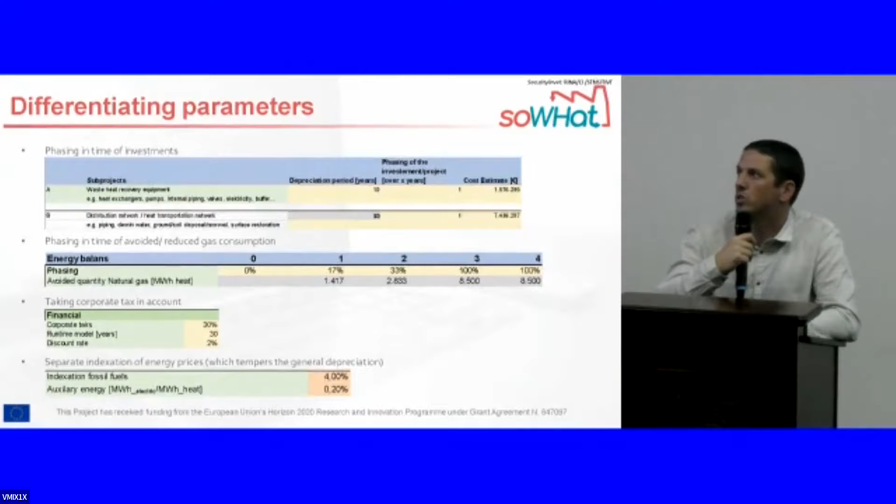Once again, you see here the differences, and you see also we've simulated the ISVAG case a little bit later, with an indexation of 4% on fossil fuels. I think it's now much higher, but it's already higher than the Umicore case, where we pointed out 2%. And it's mainly this factor which is responsible for the spread between the results. Once again, if we put the differentiating parameters to 0, you get totally the same result between the two tools.

The overall conclusion is that certainly for internal reuse, the SOWAT tool is a very good tool to point out whether a project is interesting on the economic side or not. And I think for larger cases where you sell a lot of heat to the outside world, it's very interesting in the commercial tool to include indexation of fossil fuels.

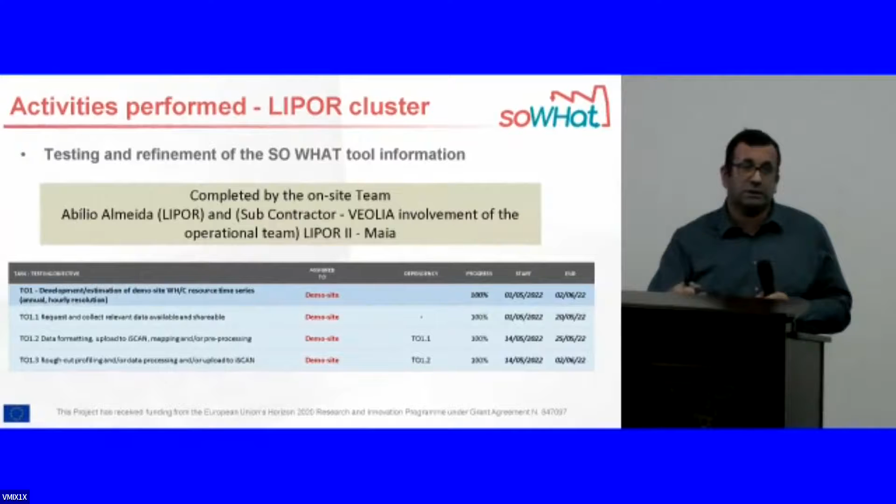During this year, we performed several tasks to test all the functionalities of the SO WHAT tool, installing and testing all the modules of this advanced tool, and uploading all the data and information required during the process. Emmanuel, as I said, talked with Veolia, and we also did. We supported the process of estimating the waste heat production and this investment with Superbock and Leonesa. So it was also a process that included talks with the stakeholders. These are all the activities performed.

I would like to show you some of the outputs. These are some print screens of the results of using the different modules. One of the most challenging activities was to import, format and upload all the data required by the software. But we succeeded with this task.

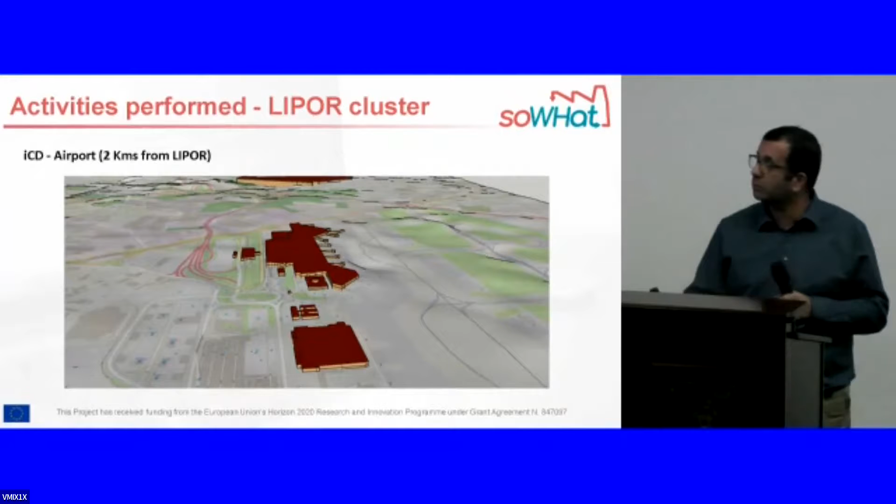Another example is modeling the buildings, in this case of the airport, as I said, 2 kilometers from Lipor. It's not a big district heating network, so it won't be such a big investment. This is a picture of the building modeling of the two new potential users, 4 kilometers from Lipor.

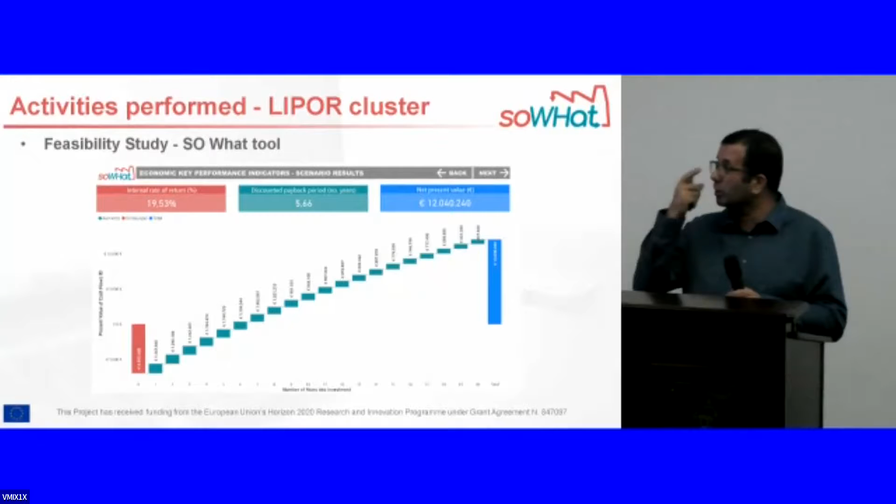And we are not considering the possibility of getting some kind of funding, because Lipor is an association of 8 municipalities. To implement this investment, 7 million euros, they will try to get some kind of funding to support this initial investment. So the economics are interesting, but now we are finalizing the sensitivity analysis, because we need to consider if the electricity prices rise, or if the prices to sell the waste heat couldn't be as big as we have considered. We need to understand which impact these deviations could have on the business model that we have studied.

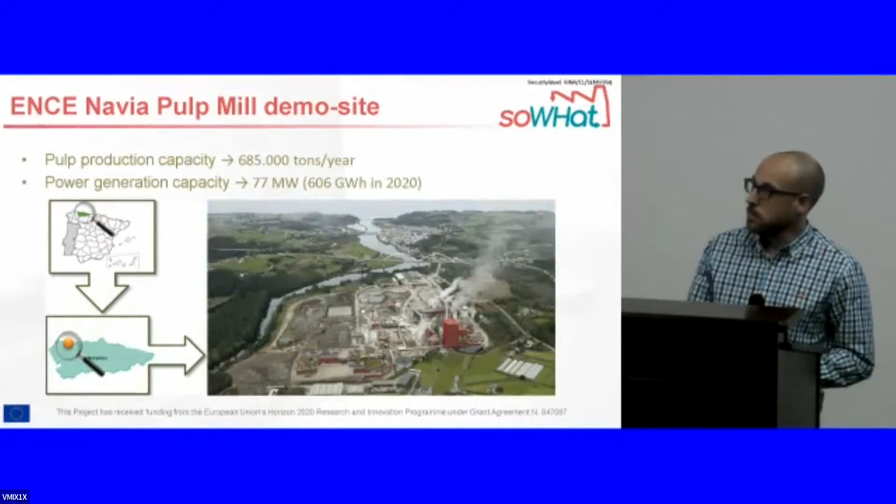At the beginning of the project, Eleukon developed an analysis of the processes of the plant, looking for potential scenarios of waste heat recovery. The results of the analysis were 3 scenarios. One of them, the biomass dryer, was built during 2019, the same year as the beginning of the SO WHAT project. This was important for us because we have had the possibility to gather data before and after the implementation of

the biomass dryer. The second one, the lime kilns, is based on the waste heat recovery of the gases of the lime kilns. And the third one, the cooling towers, is based on the construction of a district heating network that connects the factory to Navia city.

Here we have the biomass dryer. You can see 2 photos of the facility, and also a flow diagram of the facility in a simplified way. This diagram is divided into 2 parts. The one at the top is the bleaching stage, where the heat is recovered, and the other one is the biomass dryer. The working fluids are on one side the dilution of the bleaching stage, which is the hot fluid, and the cold fluid used in the biomass dryer is water. These two areas are connected through a plate heat exchanger.

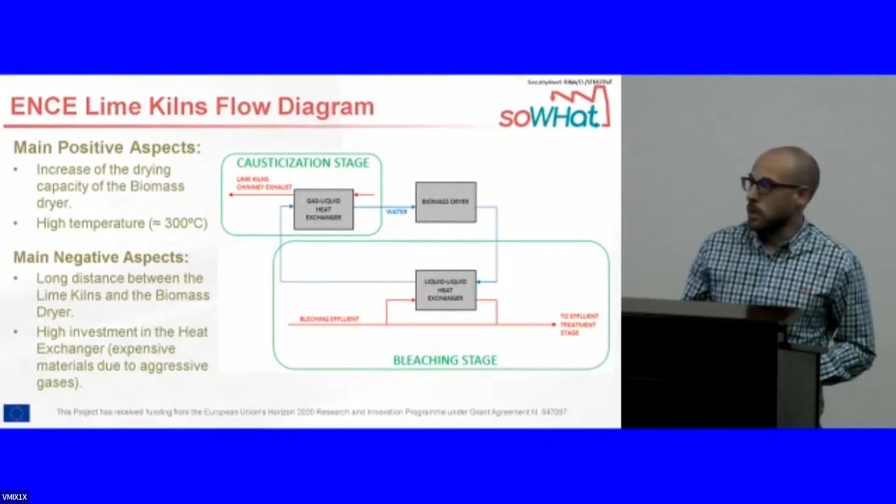That's all from my side. Thank you very much, and I would be glad to answer any question.

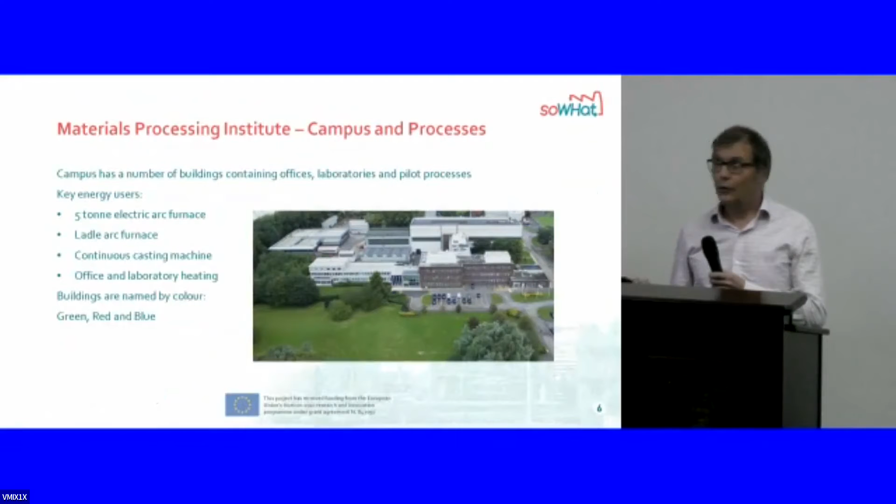So this is a picture of our campus. Our key energy users are a 5-ton pilot electric arc furnace, a ladle arc furnace, and a continuous casting machine. And we also have a large amount of office and laboratory space. And our office buildings are conveniently named by color: red, green, and blue buildings.

So there's a large amount of data collection and aggregation at the early stages of the project. There have actually been parallel projects where all our process data is now pulled into a central data warehouse, and this project's been one of the early users of this data. It was also highlighted in the assessment of our data that we needed improved cooling water data, and that's now been implemented. Again, it was a parallel project. We had a new control system for the furnace that has much better energy monitoring and cooling water monitoring.

But we still had the problem with the cooling water temperature. We didn't know it, because the cooling water tank is in an outbuilding a little way away. So we actually installed quite a novel wireless system into that building, which transmits the data back to our network and puts it in the central data warehouse, so we can put it in parallel with all our other data.

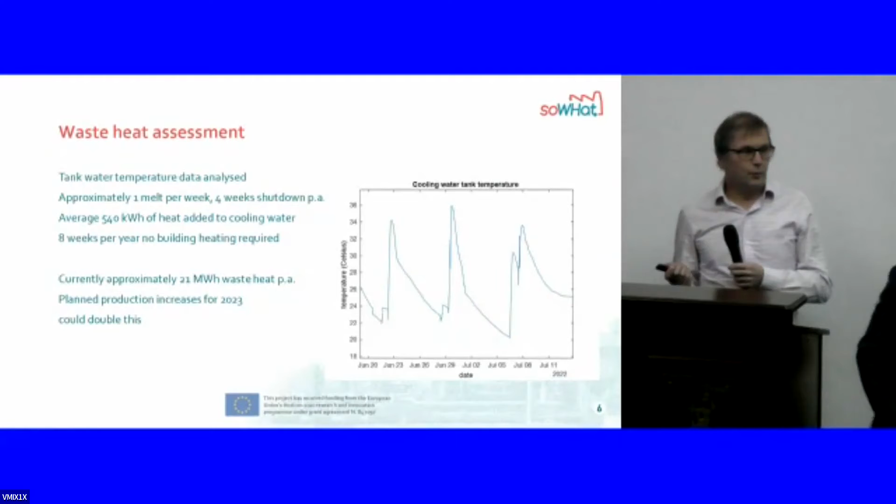And this is one of the plots you get from our cooling tank. You can see that roughly once a week we use the furnace, and the temperature in the water increases by relatively small amounts, 10, 12 degrees. But each melt, we're putting about 540 kilowatt hours of available added heat in that water. So when we work out how much heat is available per year, that's about 21 megawatt hours of waste heat. We've also got significant production increases planned in the next couple of years, so we'll probably be doubling the number of times we use the furnace, so doubling the amount of available waste heat.

So with the SoWHat tool, we modeled our buildings on site. The main ones of interest are the green building, which is the one on the right of the picture, and the blue building on the left. The one in the center, which is called the red building, is heated by air source heat pumps. So there wasn't much ability to use waste heat in that building easily.

The tool enabled a very fast creation of those models. And then we can import the production data into that, so we can then match the production data with the building heating data. So this is the output from the heating data. The plots behind actually come from the tool. And then what I've done is I've just pulled that data out so that I could compare it with our gas consumption. So that's just showing the average daily gas consumption by month per year.

And the error bars show that it models a higher and lower consumption on different days, partly because on a Monday morning, when the heating's been off for the weekend, you need more heat to get the building up to temperature. And some days it's just colder than others. So you get that variation. When we compared that to our gas use data, the estimates for the green building show that it's within about 12% of the heat we use, which is actually within the yearly variation of that data. So it's a good estimate.

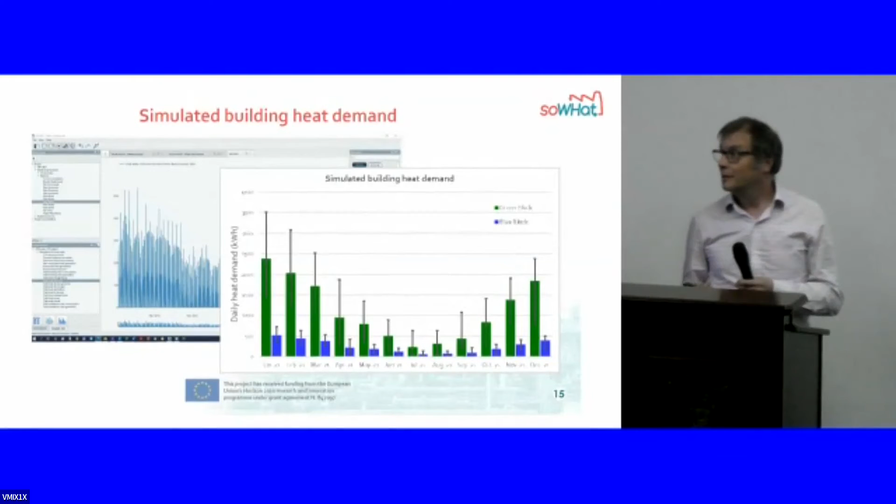So then we use the tool to create a little heat network, modeling how we take the energy out of the thermal store into a heat pump, into the heating system. And finally, we put it through the financial model, looked at the payback with the current production cycle and the planned production cycle. So the tool enables us to do very rapid and surprisingly accurate modeling of building heat demand. And that's compared very well to the measured data.

If our production increases, double our production, the payback will be much shorter, about 12 years, and double the CO2 savings.